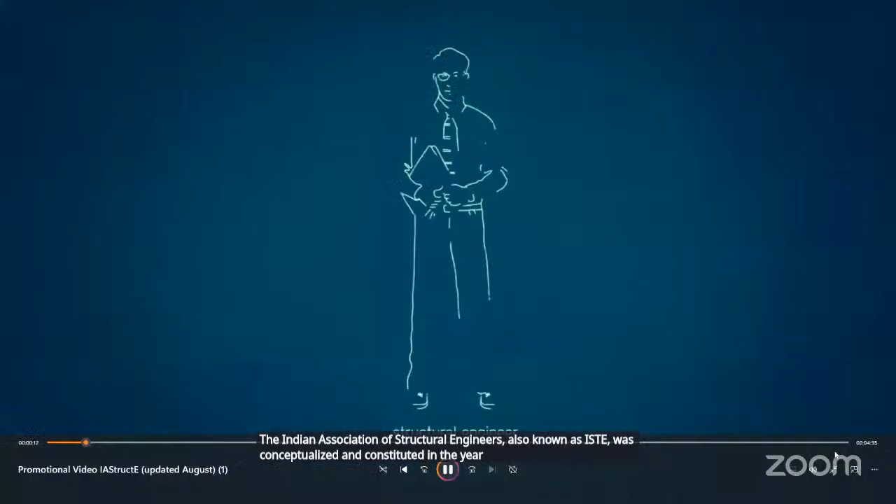The Indian Association of Structural Engineers, also known as IAStructE, was conceptualized and constituted in the year 2002 by a group of senior professional structural engineers from all over the country. IAStructE is registered under the Society's Registration Act 21 of 1860.

IAStructE is a national apex body of structural engineers in India with a mission to promote the structural engineering profession and cater to the professional needs of the structural fraternity. In the short span of two decades, the association has attained an eminent position in the professional field, and its membership is valued very highly in the profession.

Since inception, IAStructE has been led by eminent structural engineers like late Shri Mahendra Raj, late Shri Kumar Ghosh, Shri Subhash Chand Mehrotra, Professor Mahesh Tandon, Shri Alok Bhaumik, Shri Manoj Mittal and Professor R. Pradeep Kumar as its president.

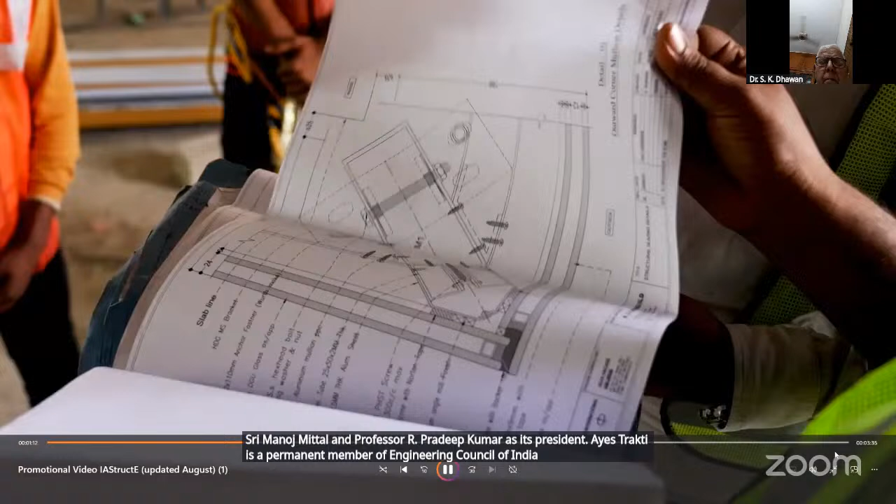IAStructE is a permanent member of the Engineering Council of India and interacts with the government on professional and policy matters related to civil and structural engineers. To expand its reach, IAStructE has collaboration with various international professional like-minded associations and institutions.

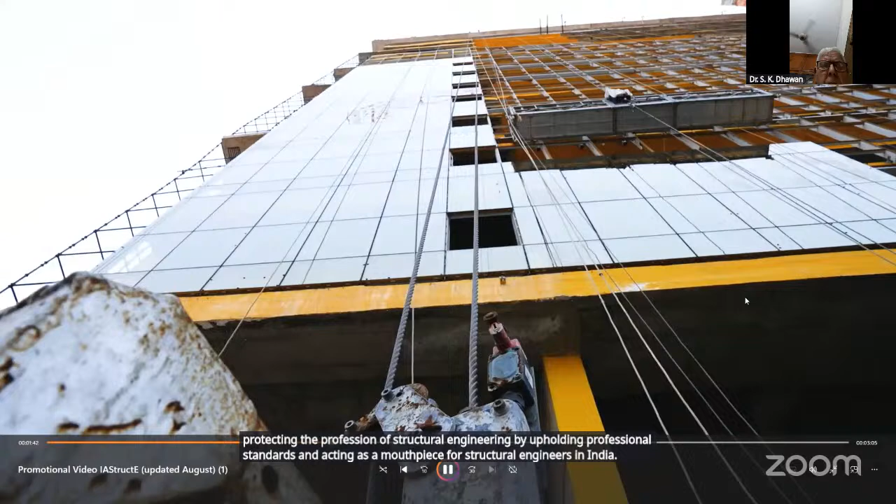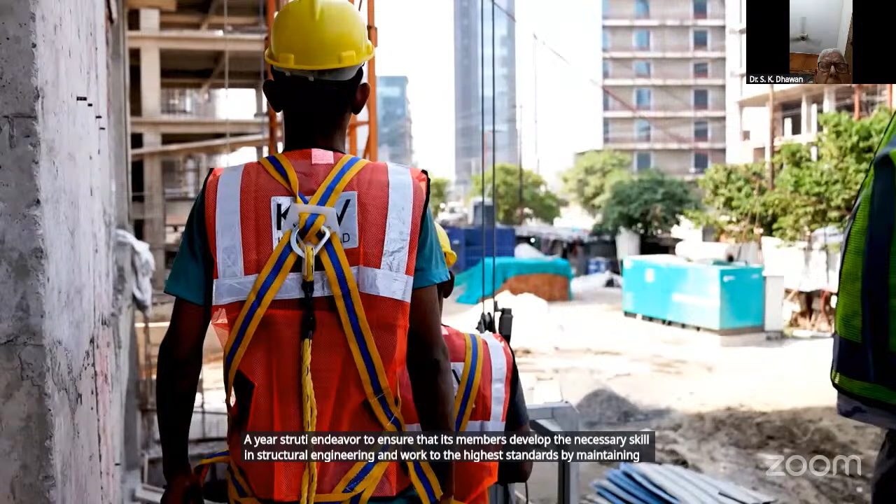IAStructE's prime objective is supporting and protecting the profession of structural engineering by upholding professional standards and acting as a mouthpiece for structural engineers in India. IAStructE endeavors to ensure that its members develop the necessary skill in structural engineering and work to the highest standards by maintaining a commitment to professional ethics and standards.

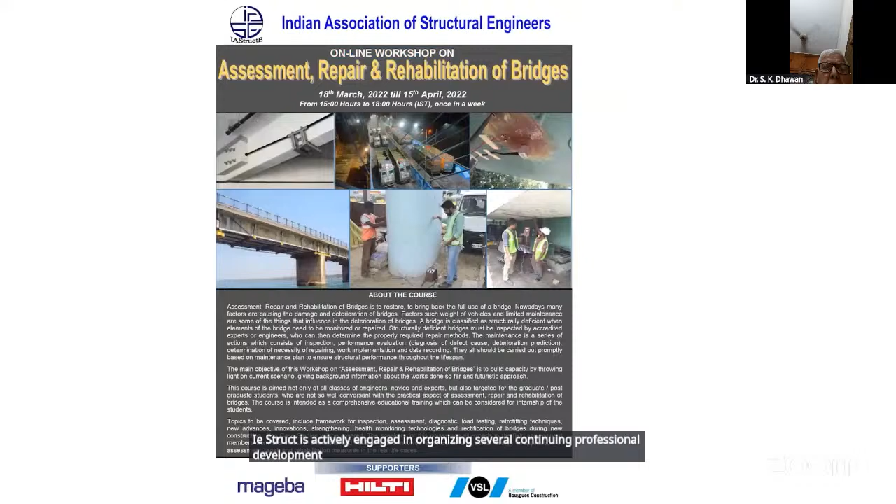IAStructE is actively engaged in organizing several continuing professional development (CPD) courses for structural engineers to help them update their knowledge and advance their career paths. It also conducts refresher courses for young and practicing engineers and student-oriented programs.

Seminars, workshops, conferences, technical lectures and discussions related to the latest technological advancements and case studies are also organized regularly for members to enable them to continuously update their knowledge and skill set by interacting with the best minds from the industry. IAStructE's activities are widely appreciated and known for quality technical content.

IAStructE is also actively engaged in publishing its quarterly journal Structural Engineering Digest (SED), code commentaries, professional guidelines, and a monthly newsletter. IAStructE's publications are becoming popular with time.

IAStructE has representation in various technical committees of BIS and IRC as well. Its members are actively contributing to National Code Formulations.

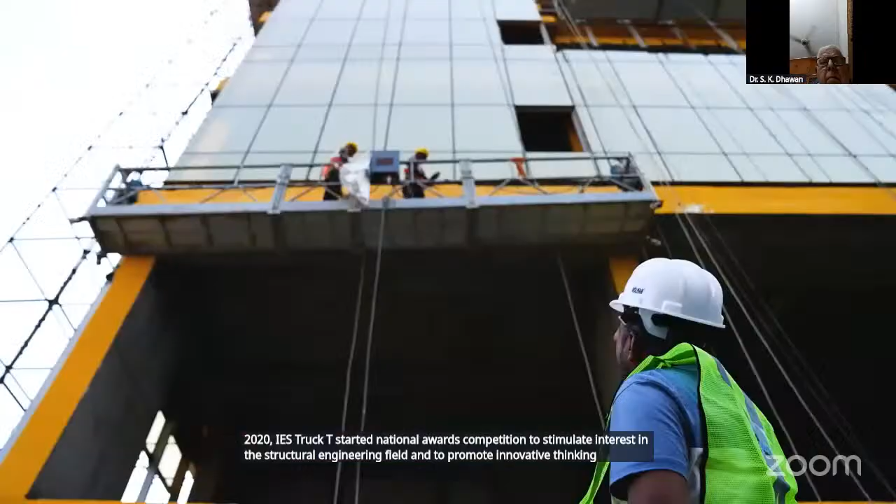In the year 2020, IAStructE started a National Awards competition to stimulate interest in the structural engineering field and to promote innovative thinking and creativity. The awards are presented to winners in recognition of their outstanding contribution to structural engineering in categories including Outstanding Structure, Outstanding Structural Engineer, Outstanding Woman Structural Engineer, Promising Young Structural Engineer, and Best Master's Thesis in Structural Engineering.

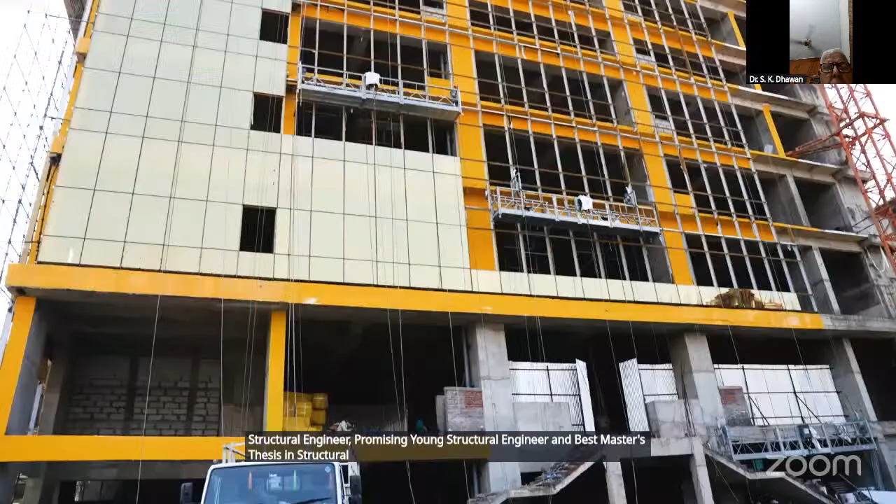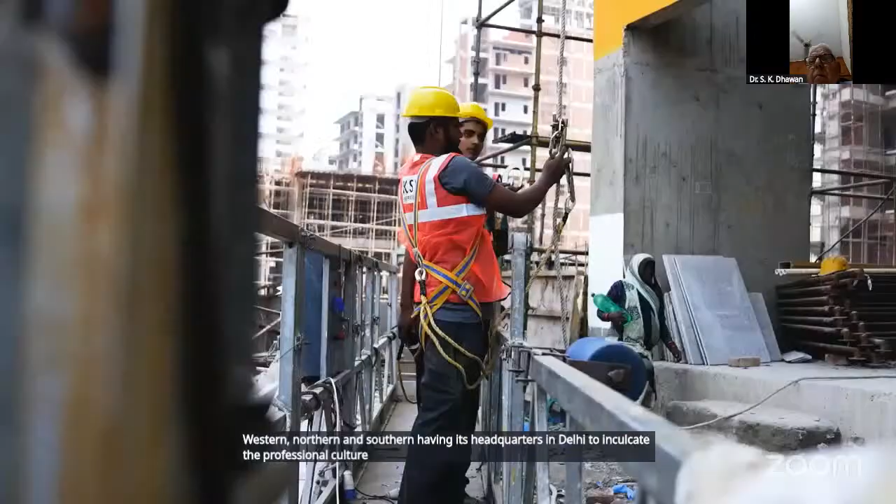IAStructE is currently operating from four regional centers, namely Eastern, Western, Northern, and Southern, with its headquarters in Delhi, to inculcate the professional culture and provide handholding to budding engineers. IAStructE also has student chapters in several leading engineering institutions.

Membership of IAStructE is open to all civil and structural engineers engaged in the structural engineering profession. Members are elected based on their qualifications and experience in different grades as per eligibility requirements prescribed in the bylaws. Each application is carefully scrutinized before electing the members.

More information about IAStructE is available on its website, www.iastructe.co.in.

Vikas, shall I proceed? Yes, sir.

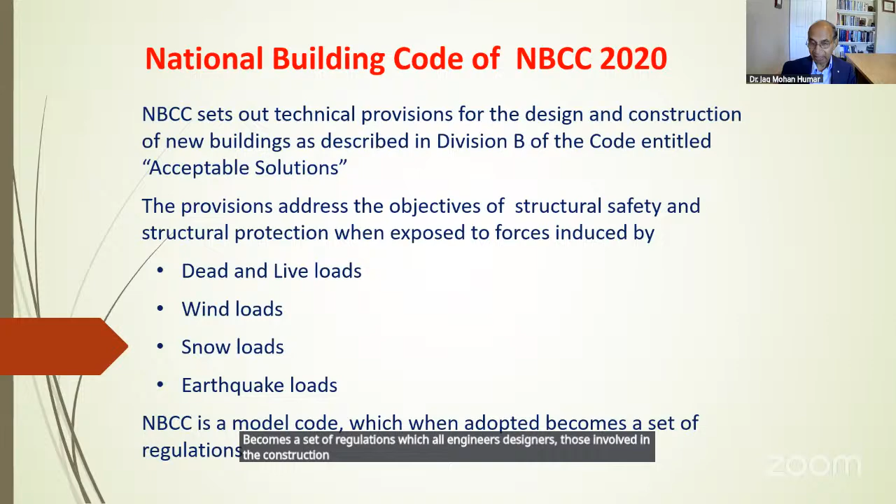This presentation highlights the seismic design provisions of NBCC. They are described in Division B, titled Acceptable Solutions, Part 4, Section 1, Subsection 8 of the code. So the title 4.1.8.1 refers to Part 4 of the code, Section 1, Subsection 8, and items 1 to 23 are referred to as articles. We are going to go through these articles, not all of them probably, but most of the major articles from 1 to 23, which describe the provisions of the National Building Code and how they are used in design and construction.

Now, what's the primary objective of seismic design? What we want is for a normal building to provide life safety protection to its occupants as well as to the general public who may be outside the building when it is subjected to ground shaking caused by a rare earthquake, and that's important. We have to define what kind of earthquake we are designing for. A normal building is designed for an earthquake that has the probability of being exceeded once in 50 years, or a return period of 2,475 years, referred to as the design ground motion. When I say a probability of being exceeded once, the chance is really 2% of being exceeded in 50 years, and the return period works out to 2,475 years. That's the design ground motion. All normal buildings are designed for this design ground motion according to the provisions of this code.

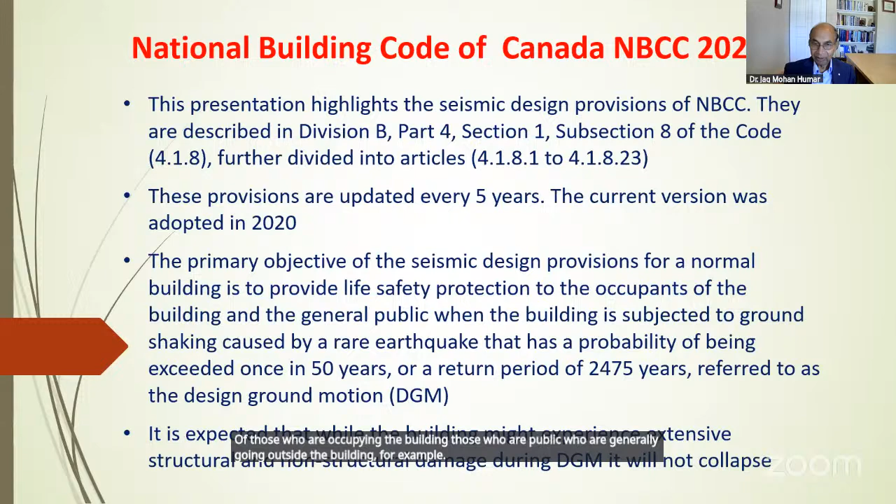Now, it is expected that the building might experience extensive structural and non-structural damage. We are not aiming to keep the building completely untouched, because that would be too expensive for a normal building. For some special buildings we might do something more. But during the design ground motion, it is expected that the building will experience extensive structural and non-structural damage, but it will not collapse. It will not jeopardize the life safety of those occupying the building or the public outside it, for example. So how do we achieve this high degree of safety?

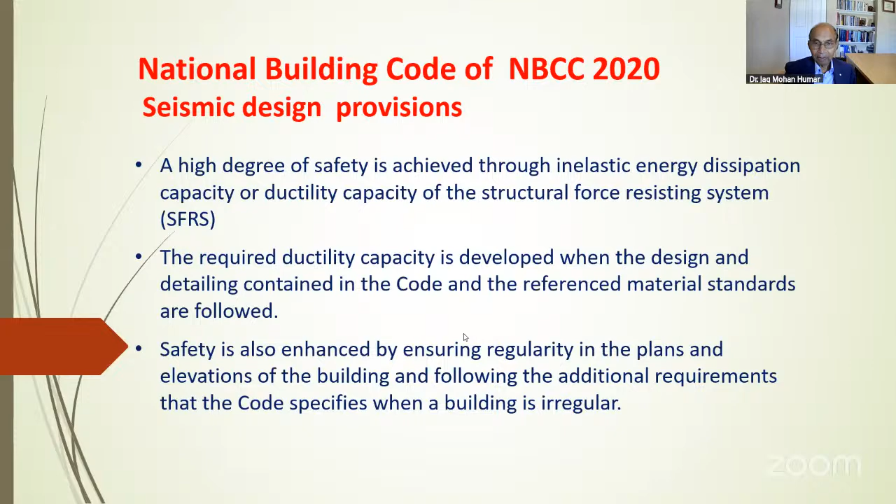There are certain categories of buildings, such as post-disaster buildings, like hospitals, water and sewage treatment plants, and high importance buildings, which are used to be occupied in the case of a disaster or after an earthquake as shelters, such as schools and community centers.

In such cases, the seismic design requirements include limiting the damage caused by the design ground motion level shaking. There will still be damage, but we want to limit it so that the building can either be functional or possible to occupy. For example, post-disaster buildings are expected to remain functional immediately following an earthquake, so one should be able to enter and carry out all expected tasks, such as in a hospital. In addition, they must satisfy requirements related to the force induced by a lower level earthquake.

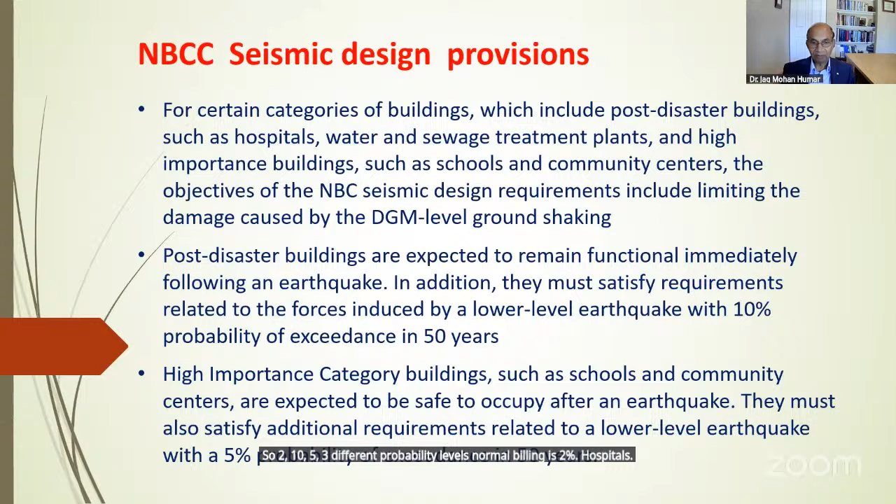This lower level earthquake has a 10% probability of exceedance in 50 years. As said earlier, normal buildings are designed for a 2% in 50-year earthquake, but post-disaster buildings have additional requirements under the 10% probability level. Similarly, high importance buildings used as shelters during and after an earthquake, such as schools and community centers, are expected to be safe to occupy afterward, so they must satisfy additional requirements related to a lower level earthquake with 5% probability of exceedance in 50 years. So there are 3 different probability levels: normal buildings 2%, hospitals 10%, and importance buildings 5%.

Now, as you probably know, Canada is the second largest country in the world next to Russia, with an area of 10 million square kilometers, and the seismic hazard varies widely across the country. So you need to quantify this hazard. In Canada, the task of quantifying the hazard belongs to the Geological Survey of Canada, a department within the Ministry of Natural Resources of Canada, so-called NRCan, which is responsible for determining seismic hazard across the country.

How do they do that? There is data that GSC and its predecessors have collected over a period of 100 years or more, including magnitude and recurrence relationships for seismic events over the last 100 to 150 years. On the basis of that data, analyzed through a probabilistic seismic hazard analysis, it provides the seismic hazard at any site in the country.

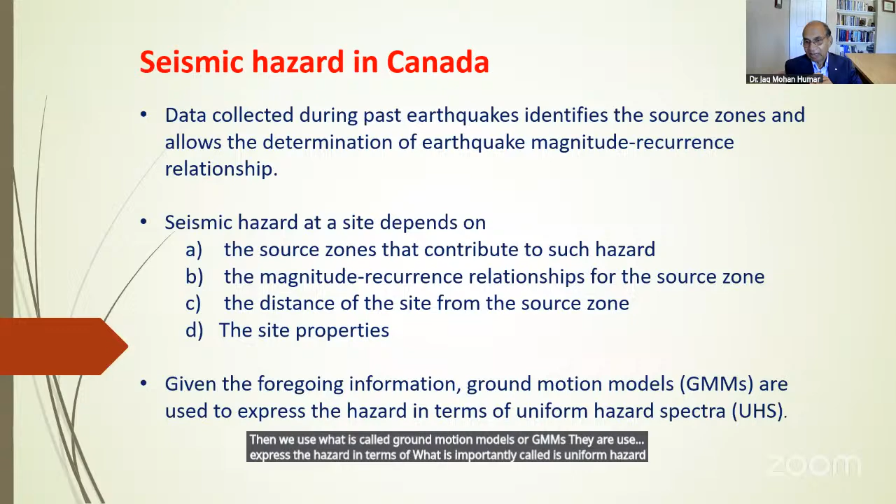If you know these 4 bits of information, then we use what is called ground motion models, or GMMs. They are used to express the hazard in terms of what is importantly called uniform hazard spectra. I need to define that more carefully, because that's an important aspect.

So what does the uniform hazard spectra do? It provides the mean values of the spectral acceleration, which has uniform probability of exceedance. And it provides these values at selected vibration periods of the building. For NBC, these periods are 0.2 seconds, 0.5 seconds, 1.0 seconds, 2 seconds, 5 seconds, and 10 seconds. So these are discrete values that we are given.

Later on, we'll see how, if the period of your building is somewhere in between, you have to interpolate, and how you do that. The seismic hazard information also provides the peak ground acceleration and the peak ground velocity.

The spectral acceleration is represented by the symbol SA, spectral acceleration, for a period T, and for site class X - we will define what X is. T is the period and X defines the site property.

So what is the uniform hazard spectrum? It gives you the spectral acceleration for a system with 5% damping induced by the design ground motion, DGM. We want to find spectra for different probabilities of exceedance: 2%, 5%, 10%. As I said earlier, normal buildings we design for 2% in 50 years, post-disaster buildings for 10%, and high importance buildings for 5%.

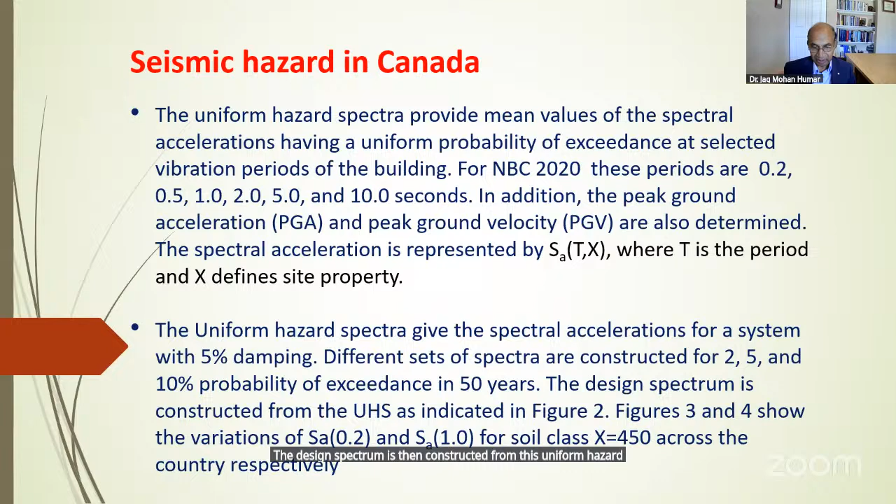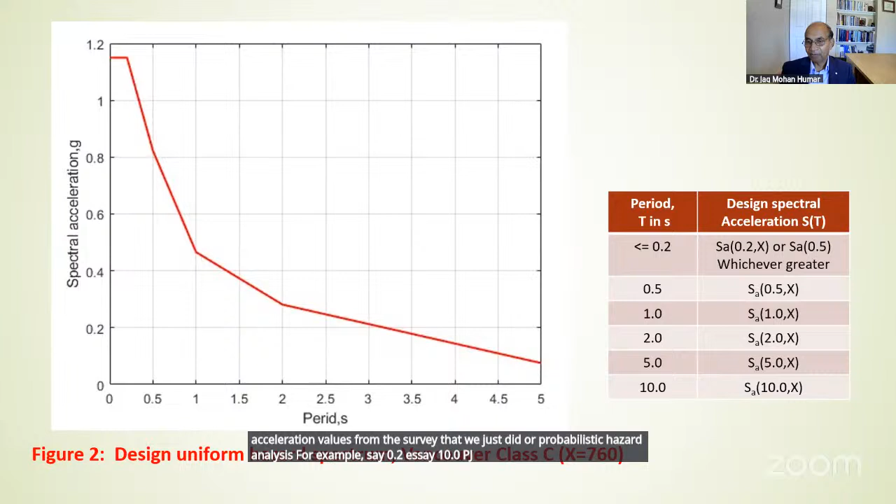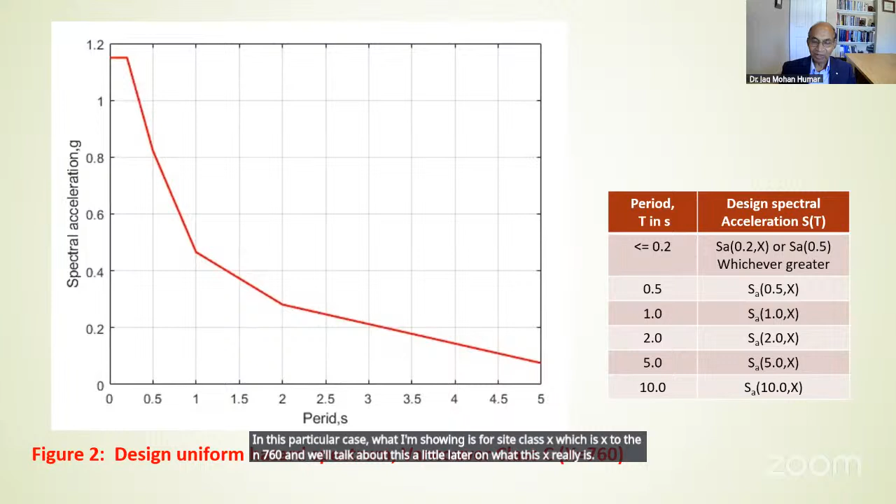First, you find out the SA values, design spectral acceleration values, from the survey we just did, or probabilistic hazard analysis. For example, SA 0.2 to SA 10.0, period 0.2 to period 10.0, for site class X. In this particular case, what I'm showing is for site class X, which has a value 760. We'll talk about this a little later on, what this X really is - it's also called class C.

And this is for Vancouver. So the value of design spectral acceleration at those periods - 0.2, 0.5, 1.0, 2.0, 5.0, and 10.0 - are given as discrete values shown here. For example, this value is for 0.2, this is for 0.5, this is for 1.0, this value is for 2, this value is for 5, and there is a value for 10 which I have not shown here.

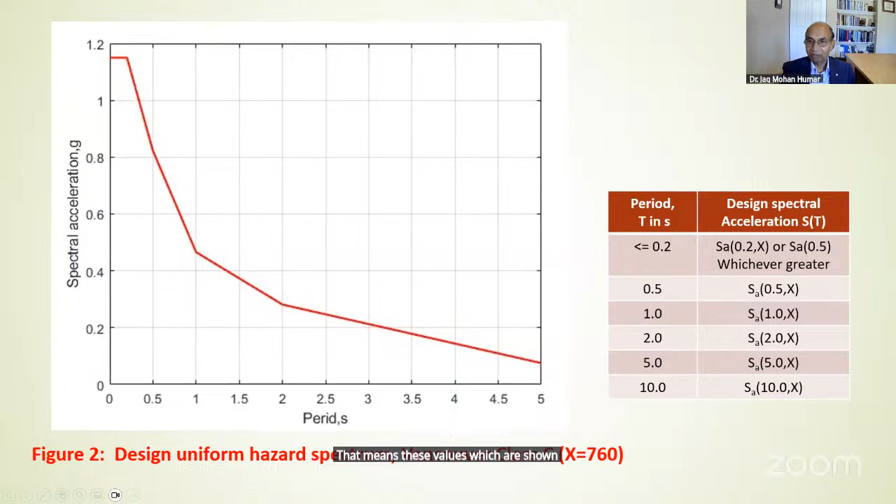In India you use a similar spectra, except that this is a smooth curve, 1 over T in the middle range, with an upper plateau, and a lower limit also given in the Indian National Code. So this is the uniform hazard spectra. When I say uniform hazard, these values shown in the right-hand column of this table have been derived for an earthquake with 2% exceedance probability in 50 years.

Just to show you some variations, this is the value of SA at 0.2 across the country for a probability of exceedance of 2% in 50 years, for site designated as X450. You'll see very high earthquake hazard areas in red, and as you go to the middle plateau, there is not much seismic activity, with values pretty low, anywhere from 0 to 0.1 or so. This is the variation of SA 0.2 as an example.

This is another map showing the variation of SA 1.0, which is much lower, of course.

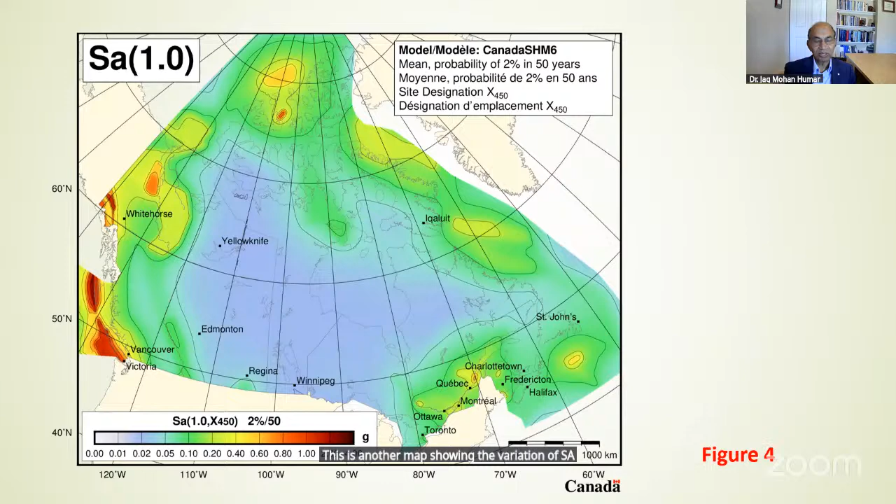Now we'll talk about that X value we have been referring to earlier. The ground motion models we use to calculate hazard include the impact of site properties. The properties of a site are expressed as X sub V, determined using the average shear wave velocity in the ground, calculated from in situ measurements in the top 30 meters of the soil profile below the foundation of the building.

Or if measurement of the shear wave velocity is not made or not possible, then we use what is called XS, where S is a site class determined from either the average standard penetration resistance, N60, or the average undrained shear strength, SU, in the top 30 meters of the ground profile. So you either use the shear wave velocity or N60. Shear wave velocity is preferred, it's more precise.

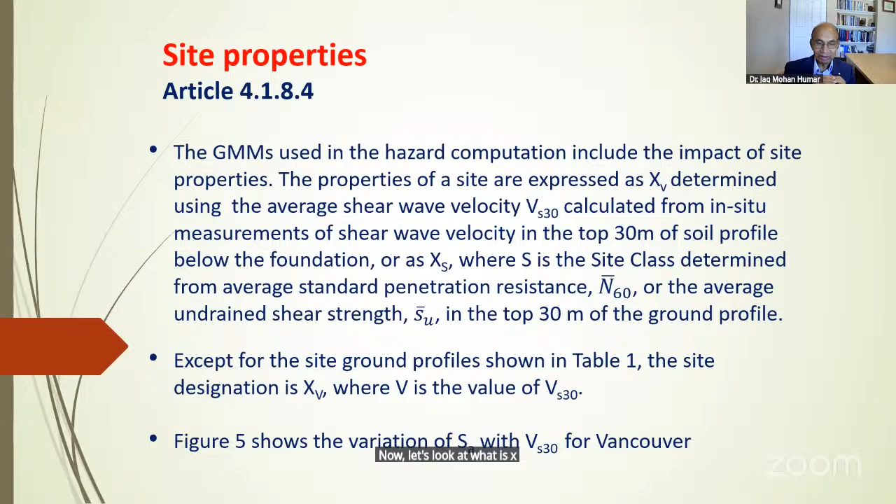If VS30 is greater than 140, but the ground profile has plasticity index greater than 20, moisture content greater than 40%, undrained shear strength less than 25 - it's a very poor, soft soil - then you call it XE, class E, which we'll deal with later. We don't give a V value here because there's no purpose given the very soft soil.

Similarly, if the ground profile contains liquefiable soils, more than 3 meters of peat, more than 8 meters of highly plastic soil, or more than 30 meters of soft to medium clay, it's an even worse situation, and we classify it as XF. So even if you have measured the shear wave velocity in the top 30 meters, you do not use those values - we give them either XF or XE. And if it's more than 760 but has these 3 meters of soft soil, we call it X760, even if it's 800, because of that 3 meters of soil. So these are the 3 exceptions.

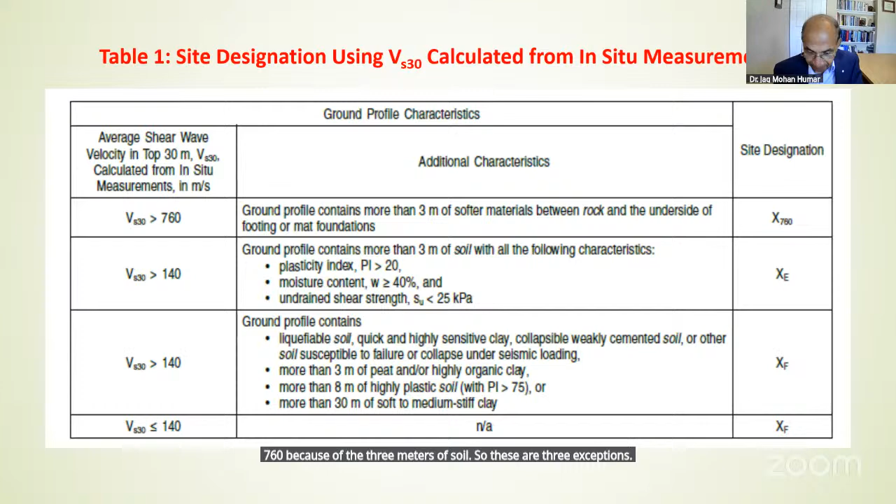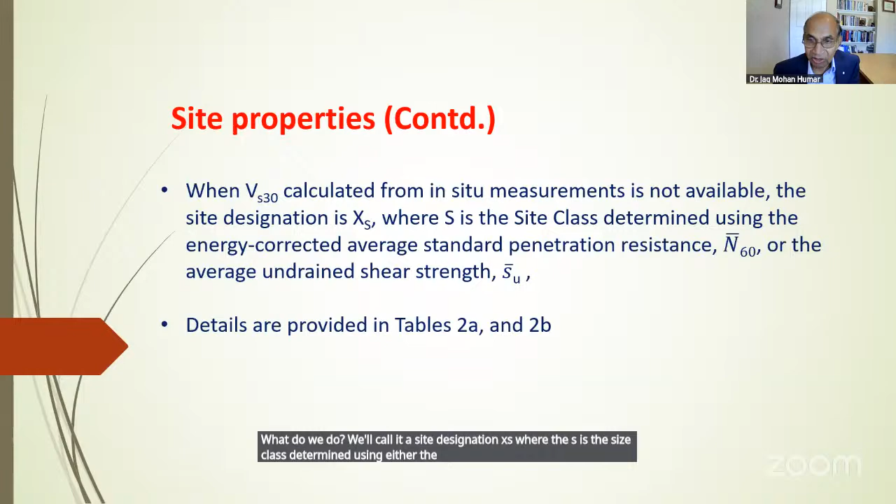So the other situation is when VS30 from in situ measurements is not available. What do we do? We call it site designation XS, where S is the site class determined using either the average standard penetration resistance or the undrained shear strength. The details are in here, for example.

Now, class A, B, C - we got to those classes A, B, C, D, E, F, up to F. If you look at this, you see a column which says VS30. That doesn't mean we have measured VS30 at the site - there may be similar sites from which measurements have been done, and our site may resemble them. So these are off-site measurements if we have them. You may not have them, then that column doesn't exist.

But we do have the average standard penetration resistance, we have the average undrained shear strength. In those cases where you can compare sites and see really very high shear wave velocity on a similar site, we don't need to worry about N60 or SU - we'll simply call it class A or class B as shown here.

But if you have values in between - very dense soil and soft rock - we'll use any one of these to classify the soil as class C, either greater than 50, or SU greater than 100, then we'll call it class C. So you do use any of these three criteria. If you're confident you have a similar site with a measured VS30 between 360 and 760, our site is similar, we call our site C. Or if you don't have that, we go to the average penetration resistance, and if the measured value is greater than 50, we call it class C. So those are the ways, and similarly we do that for D, E, and F - so-called stiff soil, soft soil, other soil.

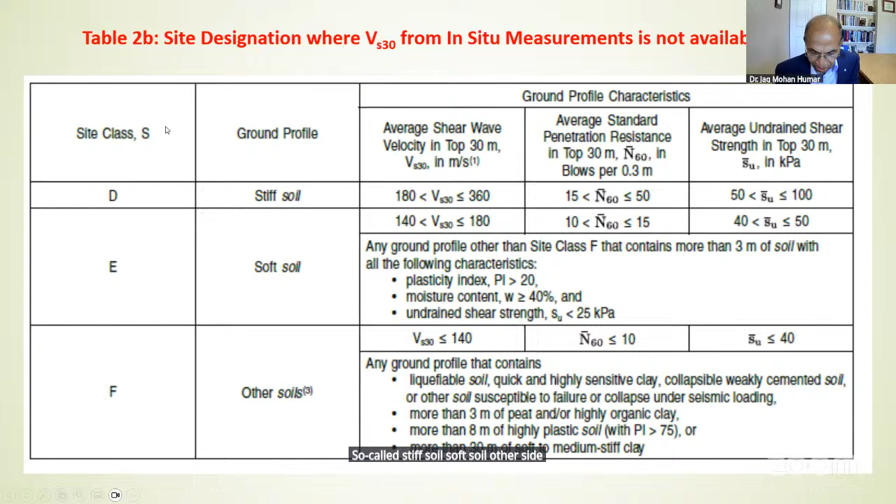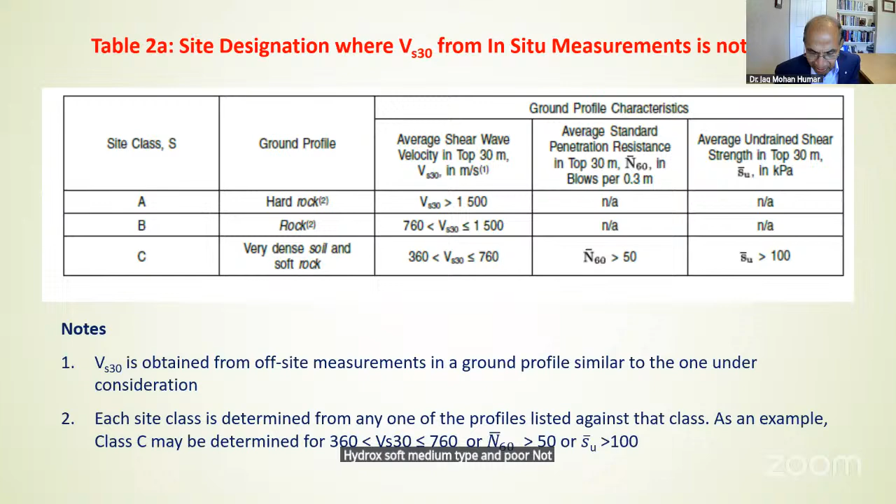Now there are, of course, similar classifications in the Indian standard for different kinds of soils - hard rocks, soft and medium type, and poor. Not exactly defined the same way, but they exist there.

Okay, so how do you find the seismic hazard in Canada? The seismic hazard for a given site is expressed in terms of a uniform hazard spectrum, as I said earlier. You simply go to a tool that the Geological Survey of Canada has produced, which is given in that link. You will have a link when you see the recording. You can click on that link, provide information on where you are located and what kind of soil you have, and you get the values of all the spectral values at those selected periods.

For example, I did this for a specific case of Vancouver. So I provided these values to that link. I said code edition is NBCC 2020. I can get values for the 2015 code as well if I want to. My site designation was XV760. So I provided that. My Vancouver is my city that I'm looking for, and its latitude is 49.25, and its longitude is minus 123.1. Alternatively, if I don't know the latitude and longitude but I know the address of my site, you give that address.

For example, where I am sitting is 3 Huntwood Court. If I provide 3 Huntwood Court, it will automatically locate that on the map and calculate the latitude and longitude, and that's all that matters. So those are the 4 bits of information: code edition, the site designation, and the latitude and longitude of your site. So you got the site type XV, you got your location, and you got the code.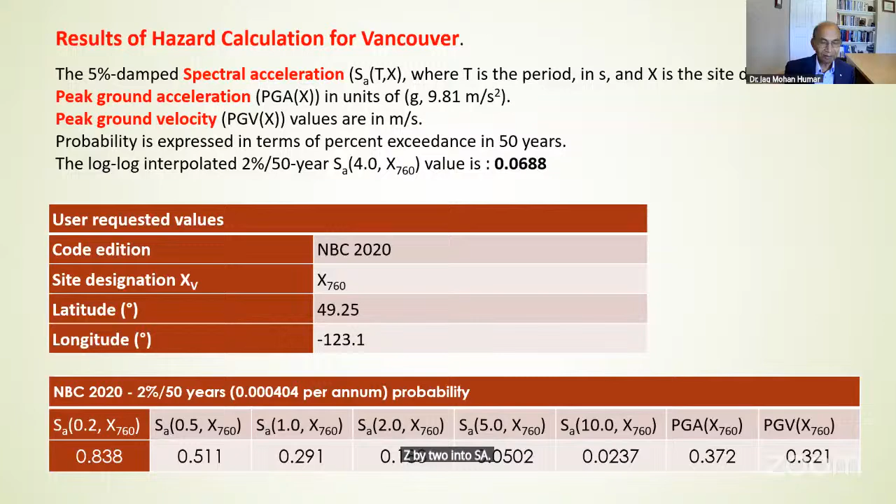Seismicity of Canada is perhaps higher, so you can always compare the two. Z by 2 into SA is what the Indian code gives. It also gives you the values for the 5% in 50-year earthquake, as well as the 10% in 50-year earthquake. Obviously, we need them for high importance buildings and post-disaster buildings. So this is also provided to us.

Okay, so how do you find the values for intermediate values of the period between, say, 0.2 and 0.5, or between 0.5 and 1, between 1 and 2? You are usually asked to do log-log interpolation over the period, and that's the preferred way. You can do linear interpolation, but there will be some error. Log-log interpolation will give you the best results. One specific case here is shown between 2 and 5 seconds.

I did a log-log interpolation for 4 seconds, and I ended up with this value, 0.0688. As you can see, it's between 0.113 and 0.0502. Similarly, values are given for 10% in 50 years. All of that was produced by that link that we just talked about. When you have time, go play with that link, and you will be able to get results for whatever latitude and longitude you wish to.

There are certain parameters that we need to talk about. They are used in seismic design, and these are important parameters. Similar things exist in the Indian code. Several parameters are used to trigger special provisions and restrictions in the design, and these are importance factors, seismic categories, and irregularity types. These 3 are very important in design, as we'll see in a short while.

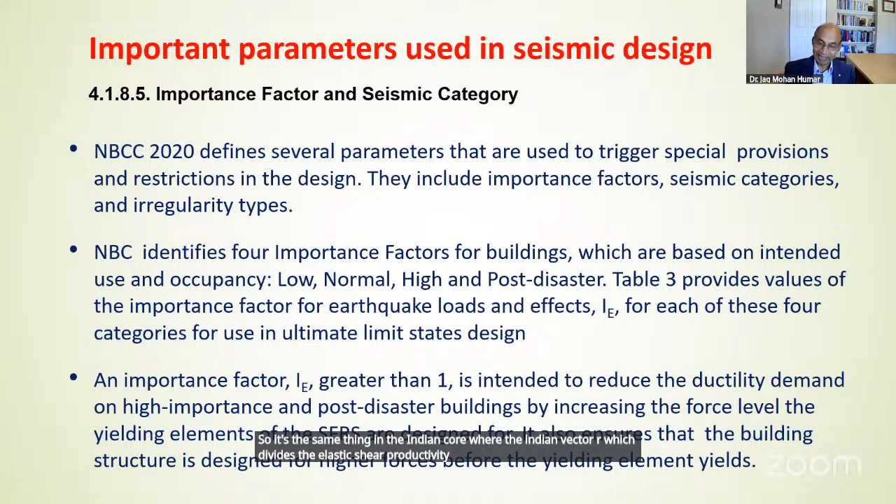So it's the same thing in the Indian code, where the factor R, which divides the elastic shear for ductility, is reduced by IE. So those are some values for the importance factor: low 0.8, normal 1, high 1.3, post-disaster 1.5. The hospitals will have IE equal to 1.5, for example.

Seismic category is another thing used to trigger certain requirements. For example, if the value of IES 0.2 ranges between 0.2 and 0.35, and IES 1.0 ranges between 0.1 and 0.2, then you have these two values. If both are satisfied, it's category SC2. Higher these values, the higher the category, so the risk is more. This is more risky than that one because there are higher values for S.

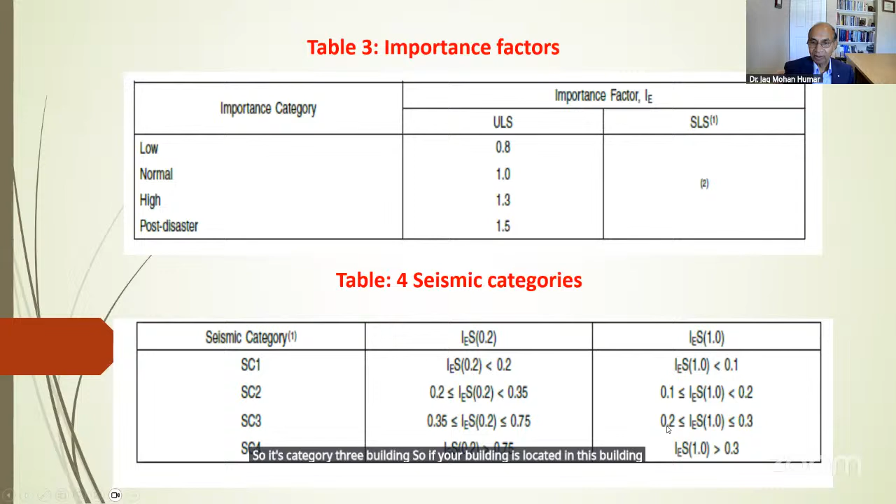So it's category 3 building. If your building is located in these zones, then it's a category 3 building, and so on. If it is in this zone, it's a category 4 building. These are used to define certain limitations on the methods of analysis, and certain restrictions are triggered by these seismic categories. The higher the risk faced by the building, the more restrictive the design becomes. They were introduced in NBCC 2020, as recently as that, as a simplified way to apply a trigger based on importance-modified design accelerations.

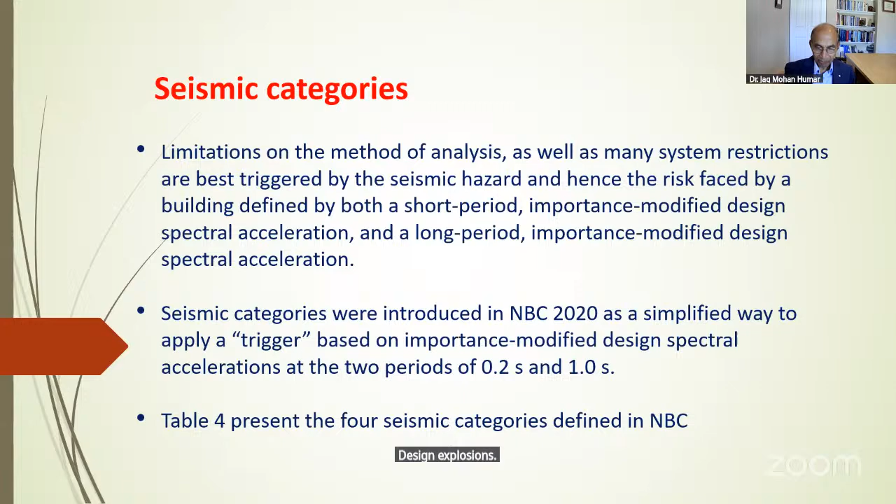Now, the last one that I mentioned was the irregularity. This is very important for structural design of buildings. If a building is irregular, it is more vulnerable, and you have to take special care in designing it. So any of the features listed in the next table, table 5, are designated as irregular. The Indian Code 1893, I believe, also defines different irregularity features and gives diagrams to illustrate what those irregularities stand for.

So structures designated as irregular must satisfy certain provisions referred to in the code. As an example, if you have type 6 irregularity, which means discontinuation in capacity or a weak story, somewhere between two stories there's a middle story which has got weak, big columns, long columns. Weak stories are very, very important to know—a weak story is probably what causes a building to fail.

I've seen, during our visit to Ahmedabad during the earthquake, two very large and important buildings fail at the basement level, because the basement level had only columns with no in-between partition walls. The upper floors had infill masonry partitions or infill masonry walls, so the upper floors were very stiff compared to the ground or basement, which was the parking level. Sure enough, that parking level's columns just failed and the whole building came down.

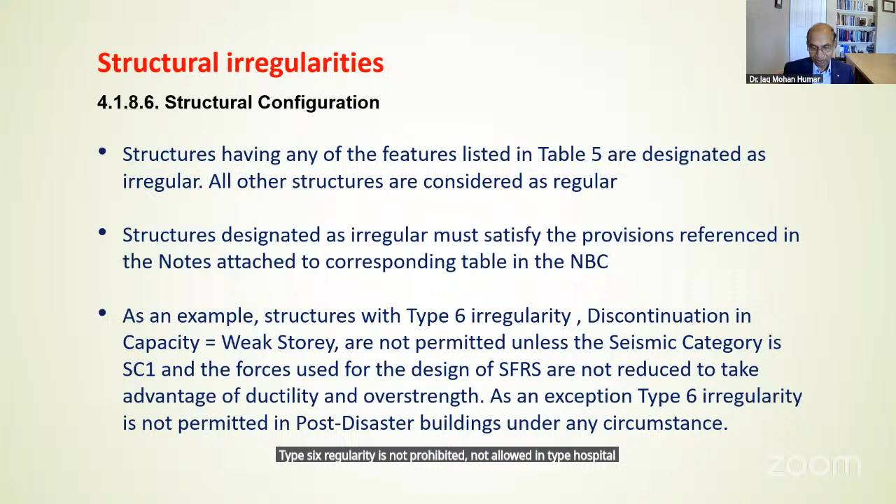And there were examples of this type happening in that area during that earthquake. Type 6 irregularity is not allowed in hospitals or post-disaster buildings, for example. So what are the kind of restrictions and requirements related to irregularity? Either it is completely prohibited—as type 6 irregularity is not allowed in hospitals—or, if allowed, design forces must be increased, or you may be asked to base the design on dynamic analysis, or maybe do a nonlinear analysis.

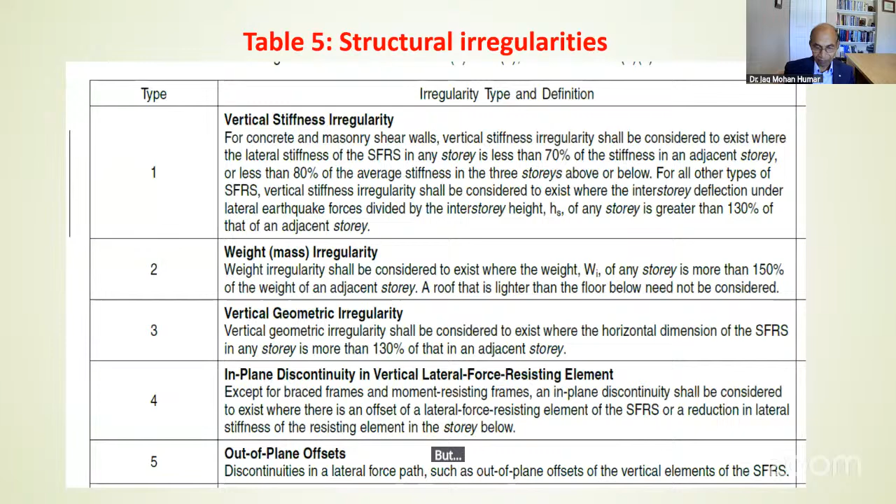So those are the types of restrictions the code specifies for different kinds of irregularities. That's the table of irregularity. I'm not going to go into detail of each one, but out-of-plane offsets are all defined in the code. Let me talk about discontinuity in capacity, or weak story. A weak story is one in which the story shear strength is less than that in the story above. The story shear strength is the total strength of all resisting elements of the SFRS, the seismic force resisting system, sharing the story shear for the direction under consideration. So if you have a weak story somewhere, it's very vulnerable, and type 6 irregularity attracts a lot of restrictions in the design. Torsional sensitivity is another one.

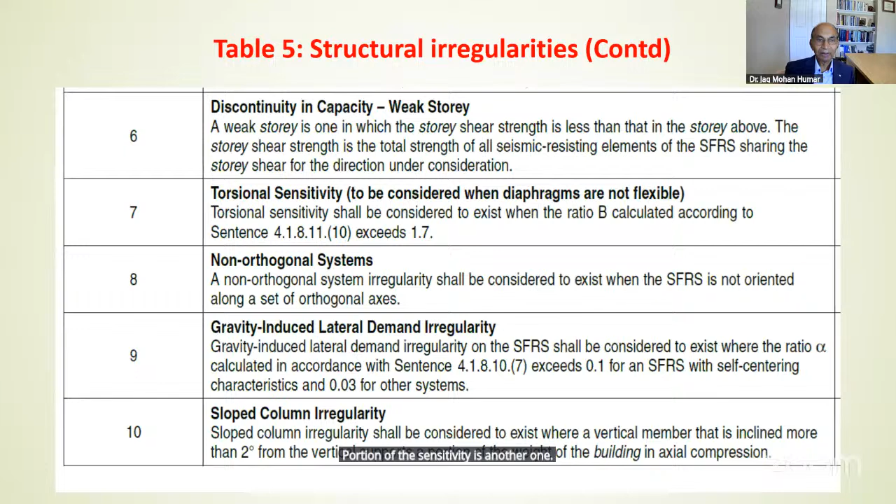Finally, we talk about how do we analyze a building. There are two methods of analysis, as you will see later on.

Normally, you are asked to do dynamic analysis, but you can use equivalent static analysis under certain conditions. One of the following conditions: the structure belongs to seismic category 1 or 2, meaning the risk is low, and it is subjected to low design ground motion.

Other conditions: the structure is regular, less than 60 meters in height, and has a fundamental lateral period TA less than 2 seconds in each of the two orthogonal directions. If all those conditions are satisfied, you can use the equivalent static method. Or, if the structure has irregularity type 2, 3, 4, 5, 6, or 8, but is less than 20 meters in height (a short building) and has a fundamental lateral period less than 0.5 seconds in each of the two orthogonal directions, it qualifies too. Short period buildings are safer.

Long period buildings are not as safe. It's historically seen that shorter buildings suffer less in earthquakes because of reserve strength in short period buildings.

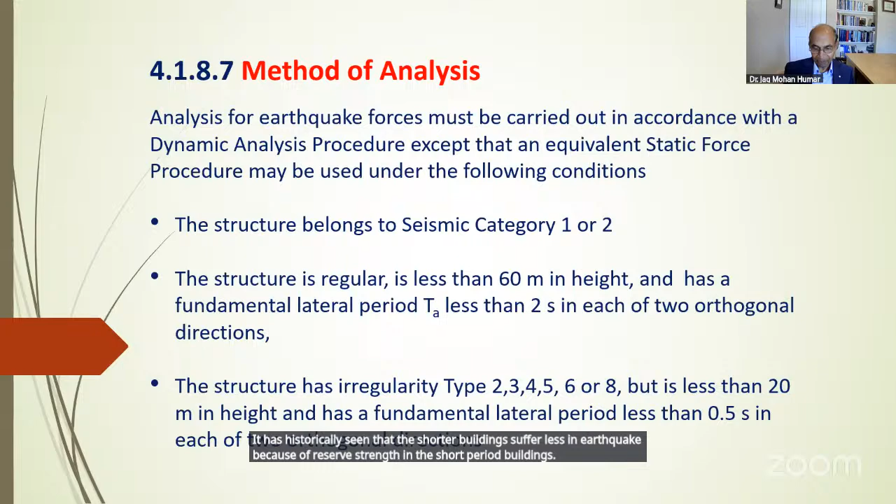The other important thing is which direction your loading is in. Wherever the components of the SFRS, the seismic force resisting system, are oriented along a set of orthogonal axes, you can do an independent analysis in each of these principal axis directions.

If they are not so oriented along a set of orthogonal axes, and the seismic category is SC1 or SC2, independent analysis may be carried out along any two orthogonal axes that you define yourself, if the building belongs to seismic category SC1 or SC2.

On the other hand, if it is not oriented along a set of orthogonal axes, and the seismic category is 3 or 4, the structure should be analyzed independently for two orthogonal directions, one for 100% and the other for 30%. The two should be combined or added to get the final result for the design forces.

You can combine X and Y, for example, 100% X plus 30% Y, or 30% X plus 100% Y, whichever gives you the higher force in the structural element that you're designing.

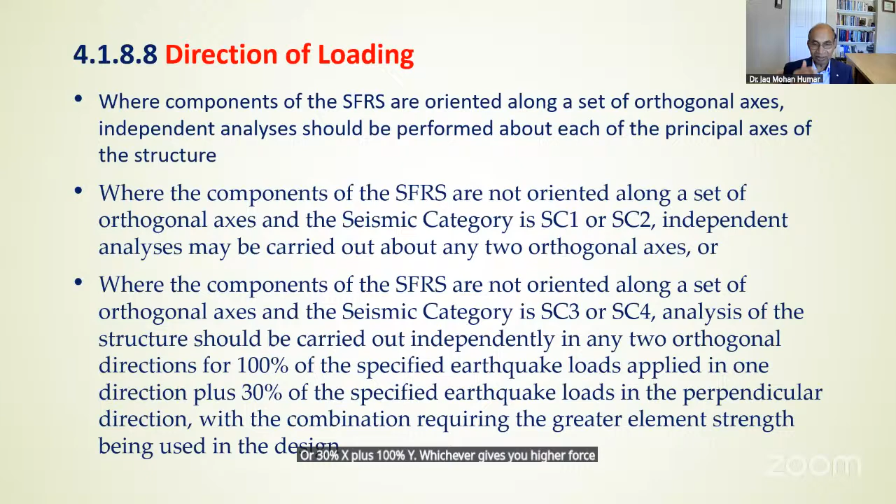One final thing we need to discuss: the ductility-related force reduction factor RD and the overstrength-related reduction factor RO. Whatever you have calculated based on an elastic analysis for your design force, you can reduce it by a reduction factor RD to account for ductility, meaning your structure will yield, but it has enough capacity defined by that RD so that it will not fail.

In addition, all structures have reserve strength which we cannot easily account for in analysis, but it can be based on past experience and experimental evidence. You have calculated strength based on your standards and codes, but there is always some reserve strength in every structure. For example, if you're using a particular strength for your concrete, the real strength will probably be higher. These reserves can be quantified based on experiments, so we use the RO factor, the overstrength factor. RD and RO are the two factors by which we reduce the elastic forces to get our design force.

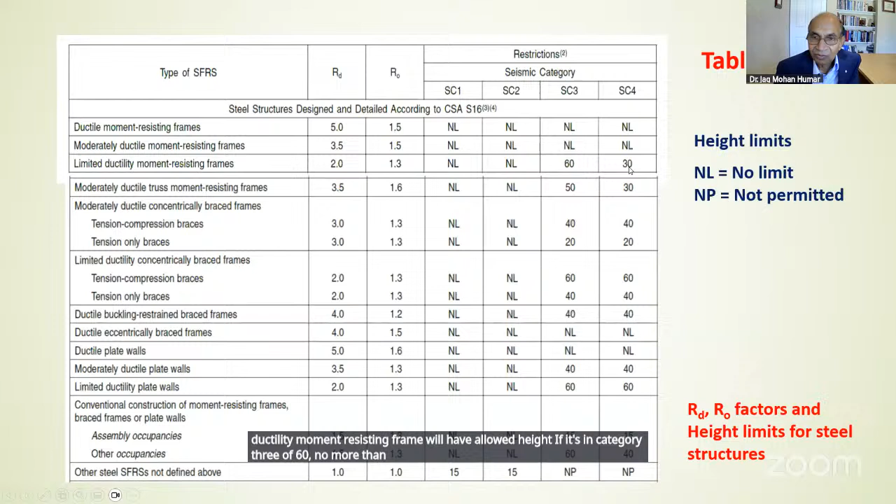The table also gives restrictions on height. NL stands for no limit. For example, a limited ductility moment resisting frame has an allowed height of no more than 60 meters if it's category 3, no more than 30 meters if it's category 4, and so on. If it's NP, it's not permitted.

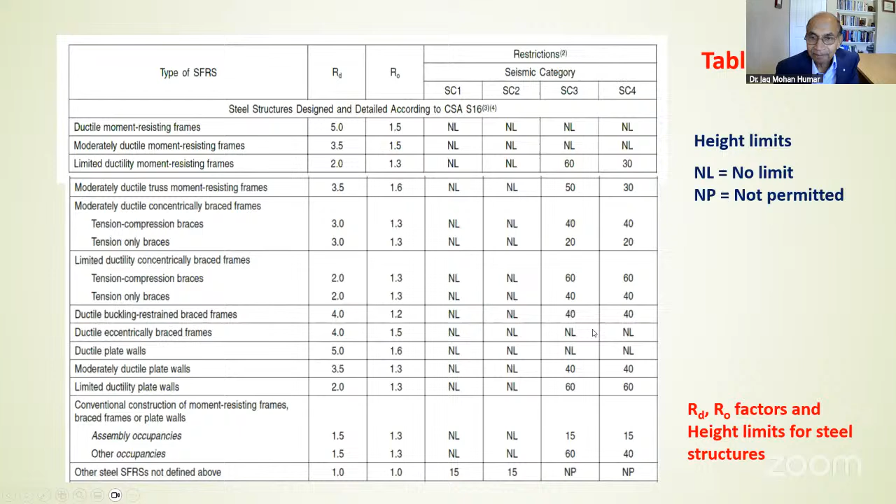That's the situation there, so that table continues here. So now we are ready to discuss the analysis procedures.

We have defined what is RD, the ductility factor. We defined what is RO, the overstrength factor. We talked about W, IE and S, but there is something more here which we'll talk about.

The specified earthquake base shear obtained, which is assumed that the building vibrates in a fundamental mode, is simply S times T times A times W. S you obtain from your hazard curves, the uniform hazard spectra, and W is of course the total weight of the building. So that's the base shear if it is vibrating in its fundamental mode.

Now, of course, the building is not vibrating in its fundamental mode, it's vibrating in a combination of modes, and those of you who have some background on dynamics of structures would know what are the different kinds of modes. If there are different kinds of mode, then you have to account for those modes vibrating together. Then you have a factor called MV, higher mode factor, given in table 7 later on.

RD, as we have also discussed, is ductility, and RO is the overstrength. So simply you take the fundamental mode value S T A W, and you have to modify it to make it less by RD and RO, because you have ductility in your structure and there's overstrength in your structure. And then if you have higher mode contribution, of course most buildings will have higher mode contribution, you multiply by MV. So that gives you the final design base shear.

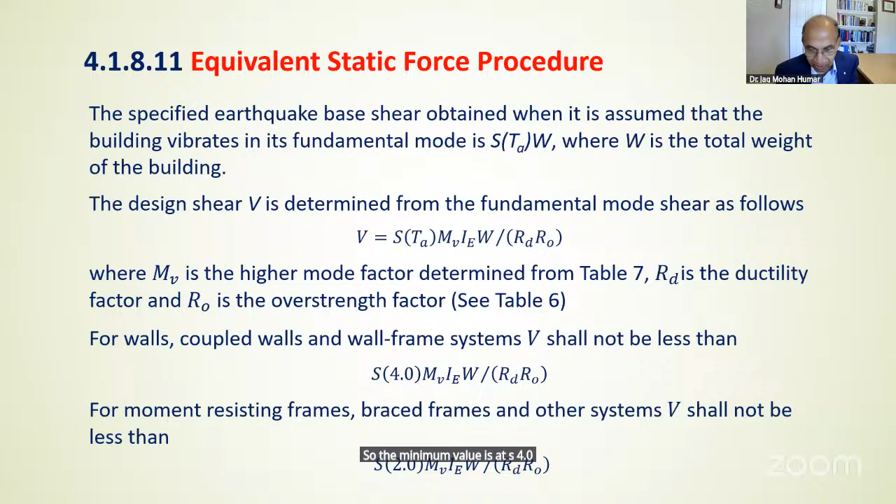In certain cases, we can also have an upper limit, 2/3 of S(0.2) or S(0.5), upper limit, whichever is greater of these two. And this is because the upper limit comes when the building is very short, 0.2 seconds.

And in those short period buildings, there is a lot of strength which is unaccounted for. It has been seen in the past that short buildings or low period buildings perform much better in earthquakes than long period or tall buildings. And we are now comfortable in reducing that or putting an upper limit on this by using this factor 2/3, or one of these factors.

The upper plateau is applied in recognition of the fact that short period structures have been observed to sustain less damage during past earthquakes because they possess extra reserve strength. The upper plateau is at 2/3 of S(0.2), but you cannot go lower than S(0.5).

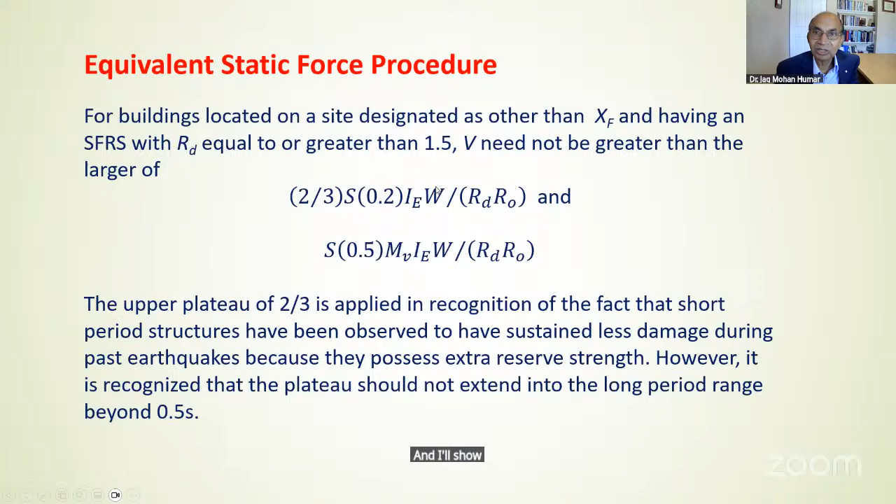I'll show you this again later on just to clarify what that means. You need a fundamental period - how do you get that TA? If you're using the equivalent static force method, you don't want to be doing dynamic analysis, and therefore you don't have a period calculated for which you need a dynamic analysis.

Empirical equations best fitted to the real calculated values.

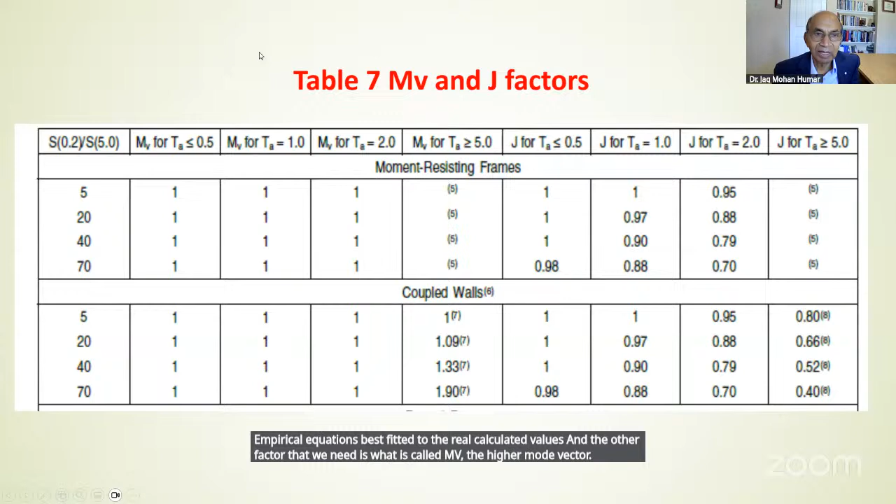The other factor that we need is MV, the higher mode factor. These are tabulated in the code, in table number 7. It depends on the value of the ratio of S at 0.2 to S at 5.0, which can be 5, 20, 40, or in between, and for different periods, MV for 0.5 seconds and less. So you have to do two interpolations, one this way and then this way.

One interpolation is for this ratio and next time for that ratio. This is for moment resisting frames, and this is for coupled walls, for example. So all the MV values, and we'll talk about the J factor shortly. The higher mode factor MV is calculated from these values given in this table.

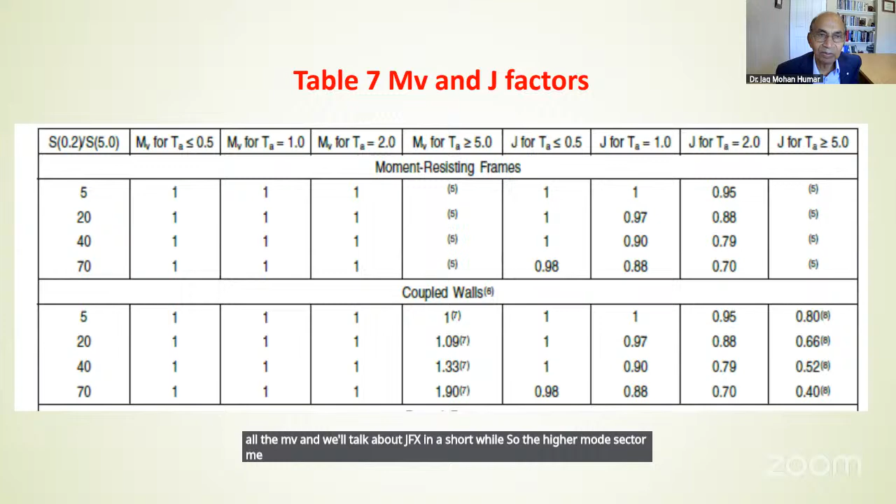Okay, so we found out the base shear. How do we distribute it across the height of the building? First of all, we take a part of that V, and we call it FT, force at the top level of the building. The value of FT is given empirically as 0.07 TA times V, and so on.

The remainder, when you take FT out of V, that's V minus FT, the rest of the shear is distributed along the height of the building. So at the very top, there is this distributed value Fx, but also there is Ft. But other floors just have Fx.

So Fx is how much? It is V minus Ft, the remainder of V, multiplied by Wx, the weight at level x, times the height of level x, divided by the summation of weight times height for all of the floors. That's the Fx value at any level x from 1 to the top. At the top, of course, you have an additional Ft.

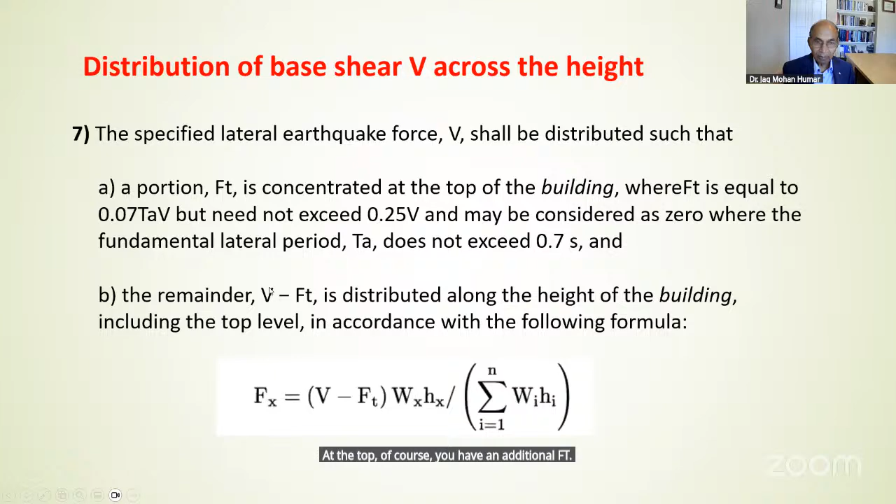Then we do the overturning moment. The overturning moment normally is Fi times the force at any level multiplied by the difference between the height of that level and the height at which you want to calculate the overturning moment. This point is X, where you want to calculate the overturning moment, and the heights go from X to N, from level X to the top level. That would normally be the expression used.

Now we want to reduce it. Why? Because all of these forces, this particular expression we just described, is based on the first mode. Since our values are not just first mode, there are different modes at the same time, so this is an over-calculation. That's too much, and we need to reduce that. There's a reduction factor allowed, given in the code in the table we talked about.

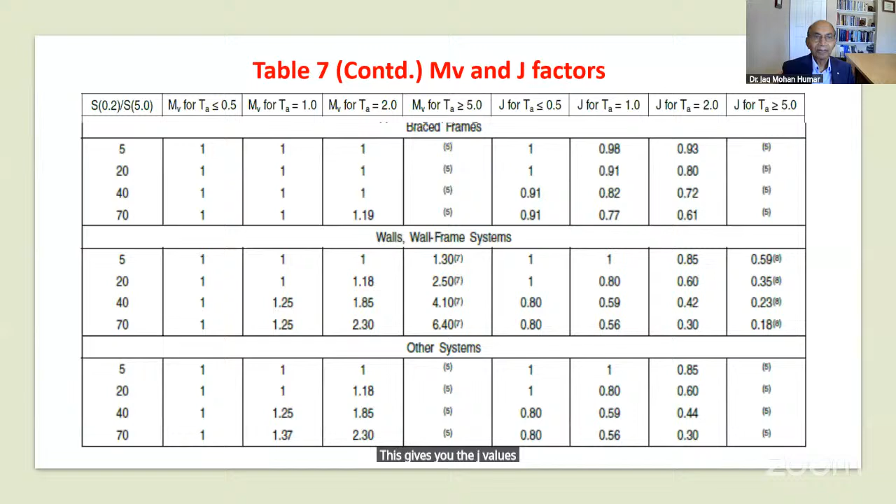This gives you the J values as well, Mv and J values again. So you reduce the overturning moment by Jx, using the value of Jx here: 1 for Hx greater than 0.6 Hn. Jx is J, the base overturning moment reduction factor given in that table, table 7.

Finally, we have done all of our calculations. We found the base shear, distributed it across the height, and found the effect of overturning moment, the effect of ductility, and the effect of upper modes.

The final things we need to talk about are the torsional effects that exist along with the forces we have. These forces just cause shear and horizontal forces, but there are torsional moments that exist for two reasons. If the center of mass and the center of resistance are not in the same line, there is a torsional moment, because the forces act through the center of mass and the building rotates about the center of resistance.

There are also torsional moments due to accidental eccentricities. Even if we have calculated the center of mass and the center of resistance, we may be off in a building. The building might have eccentricities we cannot know, because the seismic structural stiffness is different than what we assumed, or it has deteriorated.

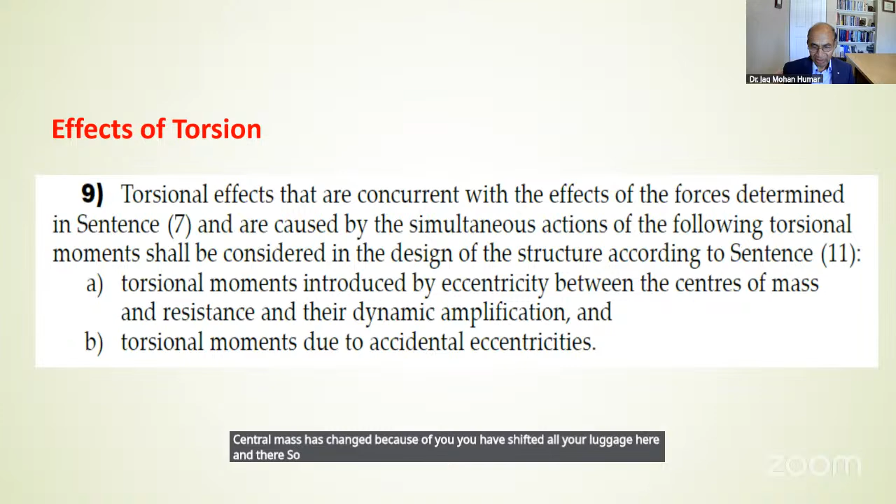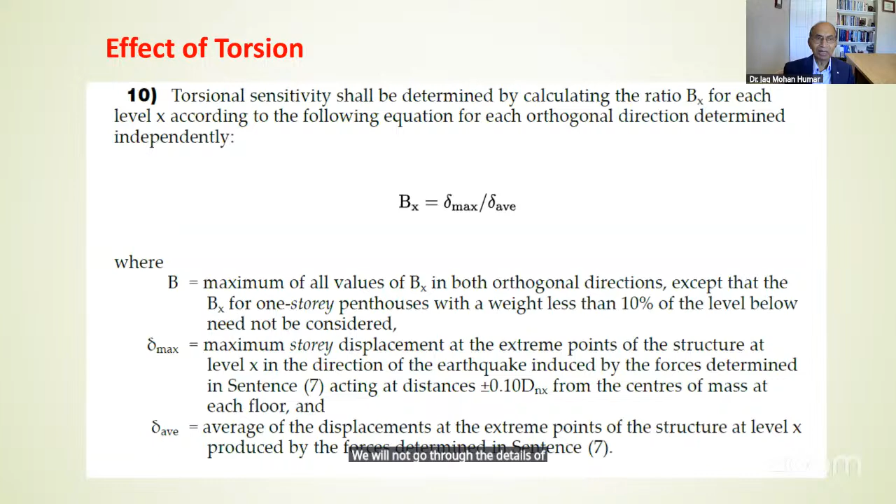We will not go through the details of how that torsion is accounted for. That's too much detail, so I will skip that for the time being. So that's the equivalent static load method.

The final one is the alternative method called the dynamic analysis procedure. You can use either one of these methods: a linear dynamic analysis using the modal response spectrum method or the numerical time history analysis method, or a nonlinear dynamic analysis, which is a special study requiring special analytical tools and skills.

So for the modal response spectrum, of course, we need spectral acceleration values. These are the same values given in your UHS, the Uniform Hazard Spectrum, S(T).

If you use the linear time history method, then you need ground motion history, and you need to create these time motion histories which are compatible with the response spectrum. Those of you who have expertise in finding ground motion time histories know how to create these so that they produce the same spectrum as you have in your design.

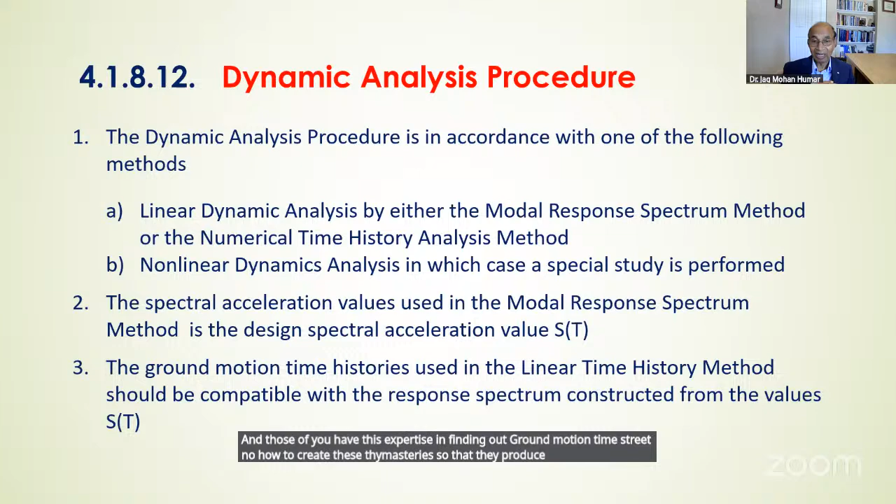Then you have to account for the effects of accidental torsional moments and the other moments caused by the earthquake forces, based on those details that we skipped earlier.

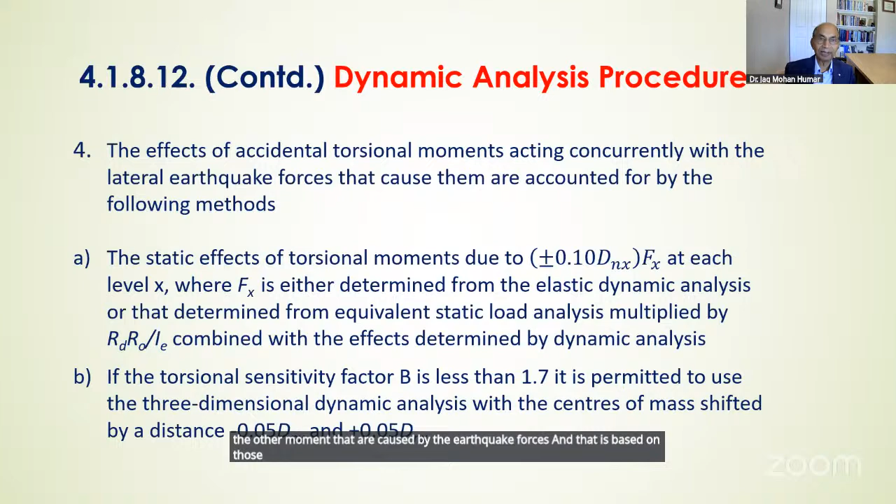Okay, so you find out and adjust the elastic value. You divide it by RD RO multiplied by IE to get your design value. Okay, so far so good. Then you can do a little bit of a trick here.

And these values have to be multiplied by importance factor IE and divided by RD and RO, just as we did in the equivalent static method, to find out the final design values. This gives you the specified lateral earthquake force, which is your design value, VD.

Now, VD should never be less than 0.8 V, as we determined from the equivalent static load method. VD will probably be smaller than V from your equivalent static load method. Capital V is the one you found from the equivalent static load method, VD is what you get from your dynamic analysis, and you usually will get lower than that. But you cannot take less than 0.8 V.

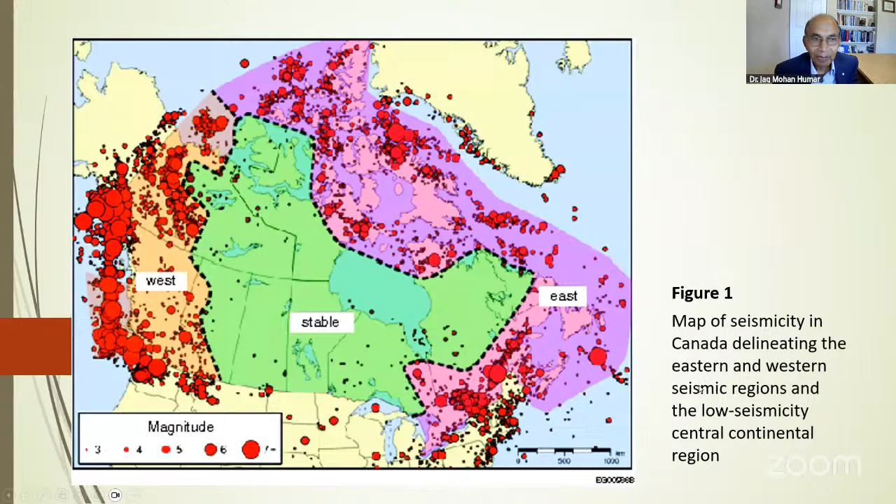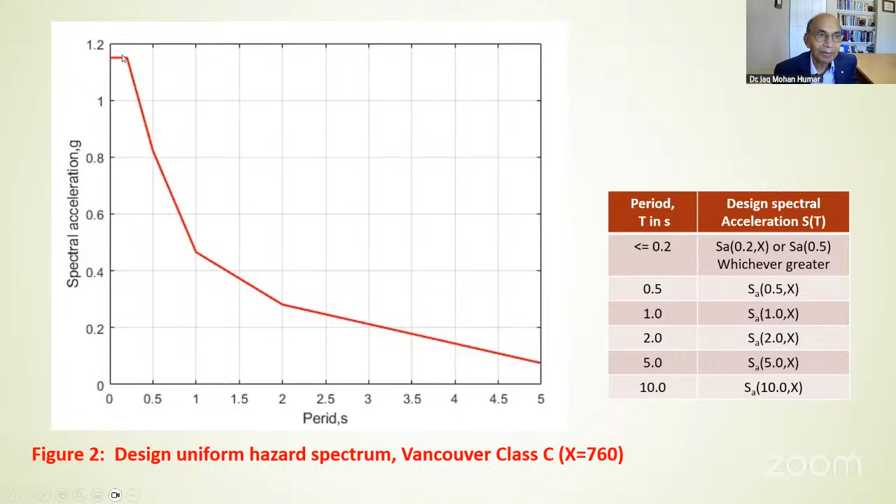Yes, back to the uniform hazard spectra, and you see the upper cap, by 0.2 or 0.5 -- this is 0.2 or less, and this now becomes 2/3 after that. So that's the upper cap. But you should never go less than what is required for 0.5.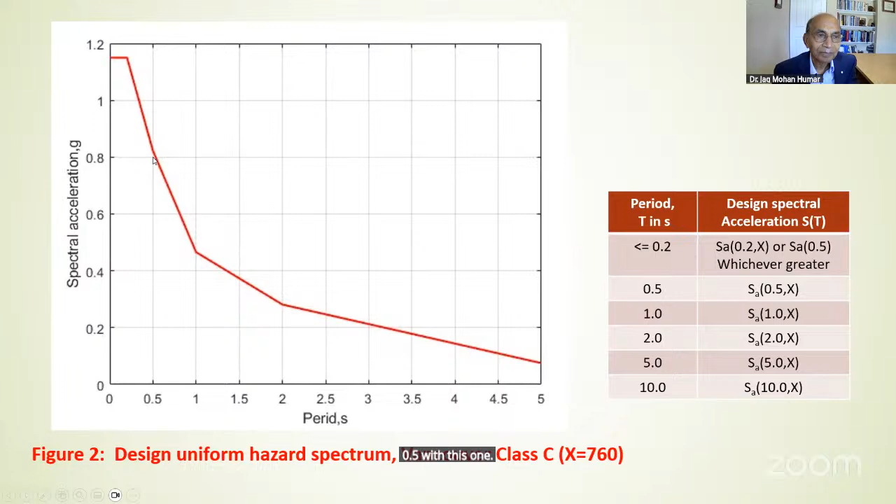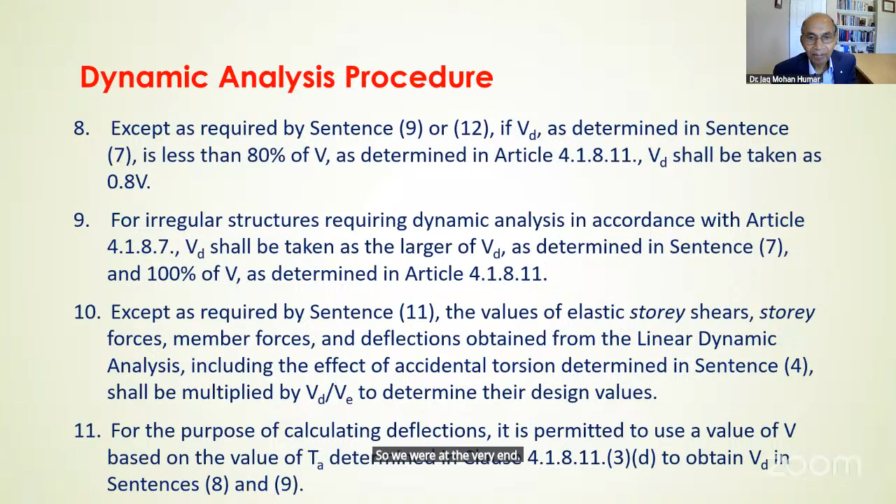So we were at the very end. Let's go to the last slide here. Okay, so we were on the dynamic analysis procedure, that's Article 12, 4.1.8.12. The code doesn't end there -- it has certain more articles, as I said, from 13 to 23 more.

And it has these definitions in these articles. Article number 13 gives you the drift limits, the deflection limits, how much structural separation you need between two buildings, design of diaphragms, collectors, chords, struts, and others, foundation provisions, site stability, non-structural components and equipment housed in the building.

The seismic isolation is an interesting thing. As you probably know, it has been used in many buildings. What you do is put ball bearing type isolators between the structure and the foundation. Any column coming down stops somewhere, and then you insert these seismic isolators or ball bearing type things, and go down to the foundation. So the foundation moves with the earthquake, but the building doesn't move as much because of these isolators, which separate the upper building part from the lower building part.

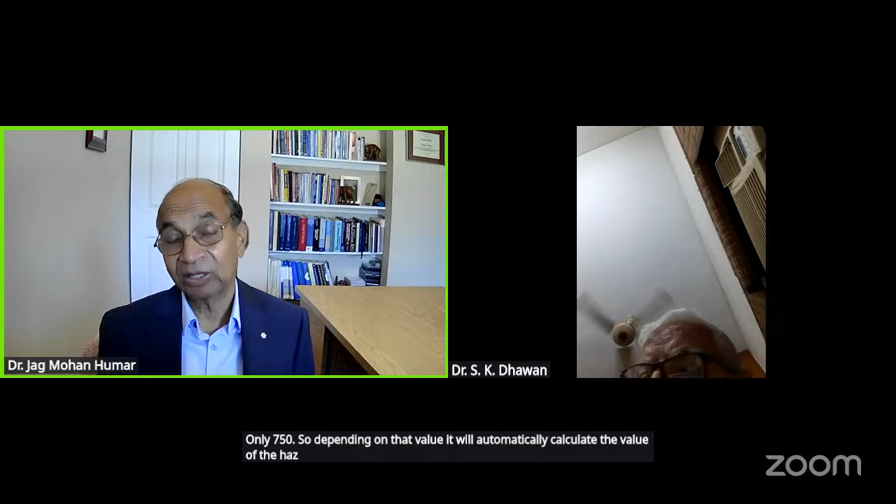And hazard, of course, varies depending on the site property. So for very stiff soil or rock, the hazard is lower. And it automatically determines that for every kind of soil. So you don't have to go to discrete values where we classify soils normally as hard rock, rock, stiff soil, medium stiff soil, low value soil, and then you get values for those hazards. But this particular tool will give you the value for any value of your shear wave velocity. If you have the shear wave velocity measurement. If you don't have, then you have to use those classes A, B, C, D, E, F.

It will provide you the hazard for each of these classes. So X450 simply means that the site soil you have has a property which gives you a shear wave velocity of 450 meters per second, averaged over the 30 meters below the foundation.

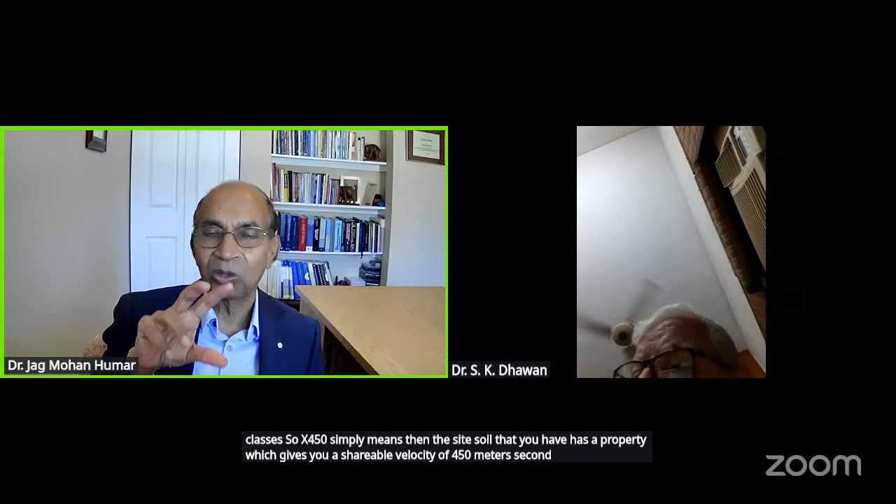Dr. Satish Sharma asked: IS 1893 specifies the maximum value of SA/G as 2.5, in your view. Should this value be upgraded in view of many earthquakes of higher accelerations in the recent past?

Mr. Sunny asked: which is the best book to understand the NBCC 2015 or 2020 provisions for steel and concrete?

The best thing is to look at the commentary of the code. Dynamics books won't give you the code values or discuss the code so much, but the dynamics background is needed. The best place to find out is the commentary - there is a commentary accompanying every code cycle, including NBCC 2020, and it explains enough for you to make judgment values. For each article it gives a commentary on how that article relates to the design, or what's the basis of it. Commentary is accessible online, or wherever you can get the code you can get the commentary as well.

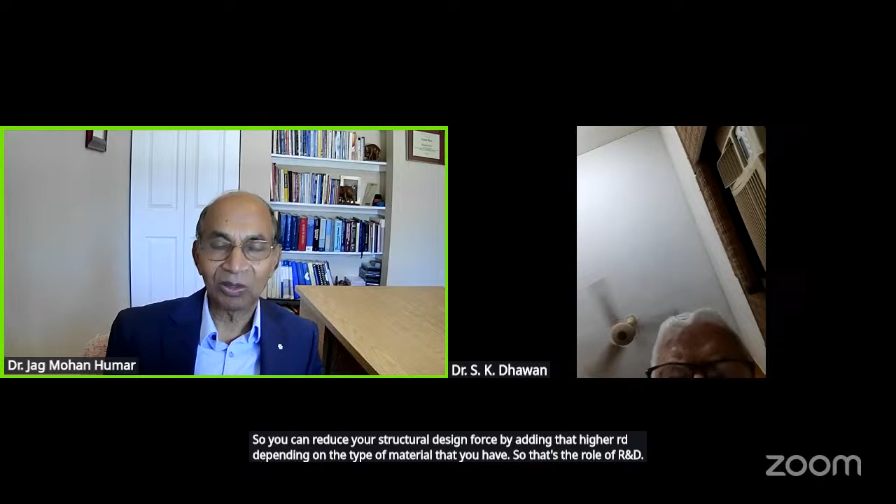RO has a similar role. Some materials have greater reserve strength - a concrete beam, for example, might have greater reserve strength than a timber beam. This depends mainly on the type of material and the type of structural system - is it a column, a beam, or a wall? Based on this you determine RO, based on experimental evidence from the past, and these RO values are tabulated in the code for each structural system. You use the proper RO value and the proper RD value - ductility and overstrength. If you have both, you can reduce your elastic force by RD and RO.

Dr. Subramaniam Narayan sir asks: I heard somewhere that the equivalent static method of analysis gives good results in regular buildings - is it true?

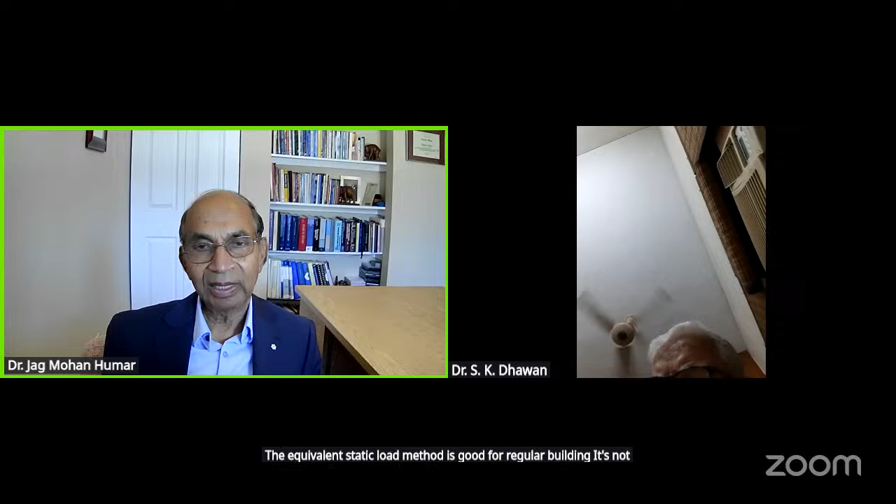The equivalent static load method is good for regular buildings. It's not good for irregular buildings, and the code really defines that irregular buildings of certain types will need dynamic analysis. In fact, some of them might need even a non-linear dynamic analysis, depending on the type of irregularity you have.

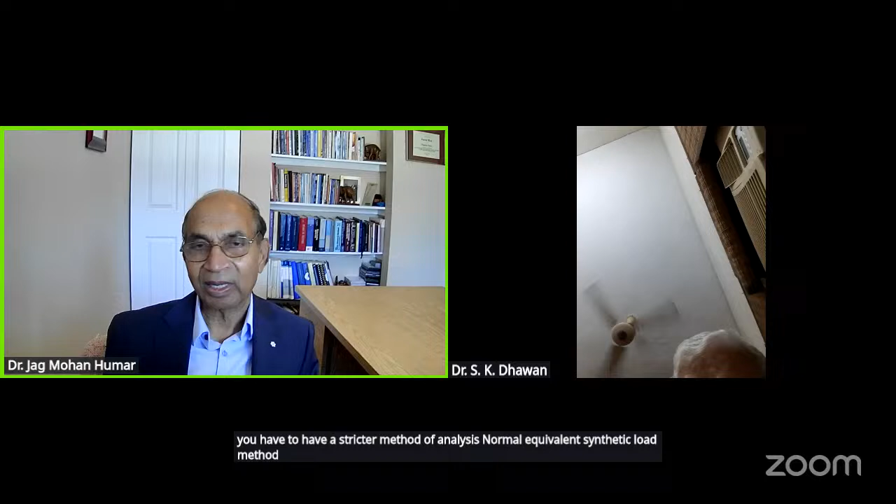Irregularity means you have to have a stricter method of analysis, because the normal equivalent static load method will not work in a building which has got, for example, a weak story, an offset, or drastically changing stiffnesses, different kinds of irregularities that are defined in that table. Any one of those will produce a building which is difficult to analyze using the equivalent static load method, in which case those are prevented.

That's number one. Number two, if it's a high risk building, meaning you belong to a very high value of the hazard spectrum, then again you have to be very careful that you do not use the equivalent static load method, because under high values of those, there is a higher risk or a higher vulnerability.

That's also clearly defined, under what circumstances you can use the equivalent static load method. There are certain restrictions under which you can use it. For a regular building, yes, there is every chance you'll be allowed to use it. If it's an irregular building, there may be restrictions on whether you use it - is it a tall building, is it a short building? Those are some of the risk factors. Depending on that, you can use one or the other method. So the code very specifically lays down the situation in which you can use the equivalent static load method.

And when I say code, it's the National Building Code of Canada, which has got these restrictions laid out. That was part of the presentation. So when you get the recording, you will be able to note that.

Mr. Amit Gupta asked, what are importance factors and RD and RO for a very important structure like a concrete gravity dam?

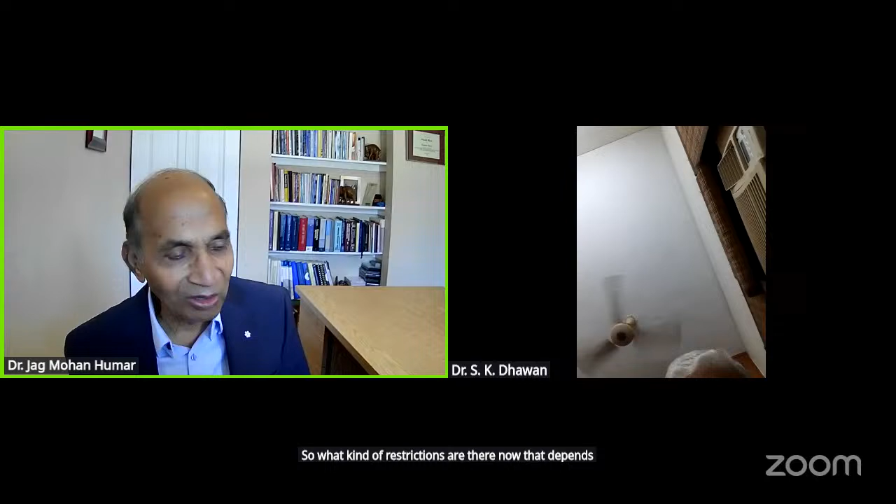That depends on each jurisdiction, or municipality, or province, or state in which you are located. They might give special regulations that all buildings have to be upgraded to 2020, or certain classes of buildings have to be upgraded to 2020. For example, heritage buildings like the parliament we were talking about - we want to upgrade it to the latest one, 2020, let's say. It also depends on cost effectiveness.

You cannot ask every owner of a building to upgrade. For example, you have a home designed for the 2005 code, and now it's 2020 and you want to upgrade it. If you are required to do it, you have to spend money. So the municipal area has to weigh these factors and decide whether everybody should upgrade to 2020. Mostly no, but for critical buildings like hospitals or power plants, you may want to upgrade to the latest code.

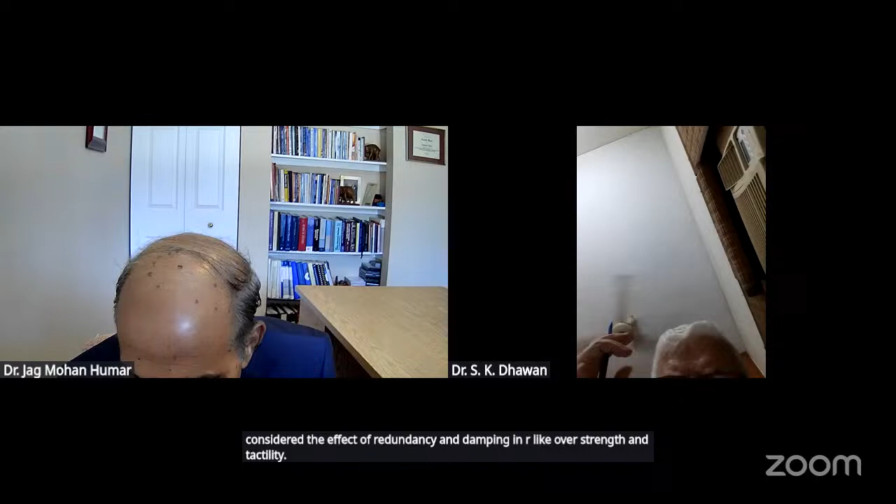Mr. Shashi Shekhar asked: Does the Canadian code consider the effect of redundancy and damping in R, like over-strength and ductility? And his second question: in place of normal concrete, if fiber reinforced concrete is used, how to calculate R, and how to limit the parameter of R calculation if no practical data is available for FRC?

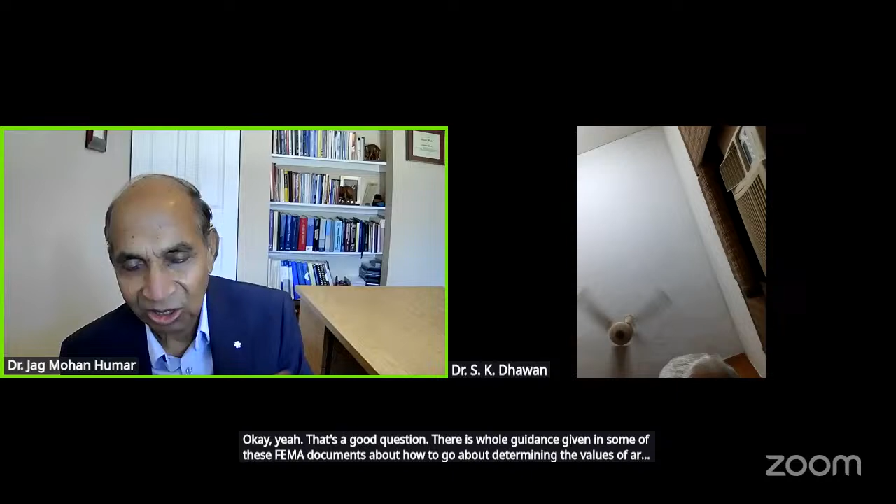That's a good question. There is whole guidance given in some of these FEMA documents about how to go about determining the values of R for types of structural systems not included in the code. Every time you come up with a new structural system, sometimes you have to define what's the RD and RO, and there's a series of methods for doing that. There's a whole document published on it, though I don't remember the number.

For example, when we went to the 2020 code, we redid most of the RD, RO calculations to see whether they comply with the latest methods for determining these values. These are mostly based on experimental evidence for the type of structure and material you have, with specific methods for determining these values. The best way is to find this structural publication, which gives the details. We have a group within our code committees doing exactly that for certain types of structures.

Mr. Sachin Oak asked: I did visit the Senate building in Ottawa last week. For such long-term projects, are the changes in the code applied along the construction period? For example, the Senate building work might have started before NBCC 2020 came out, so will this code be applicable to the construction?

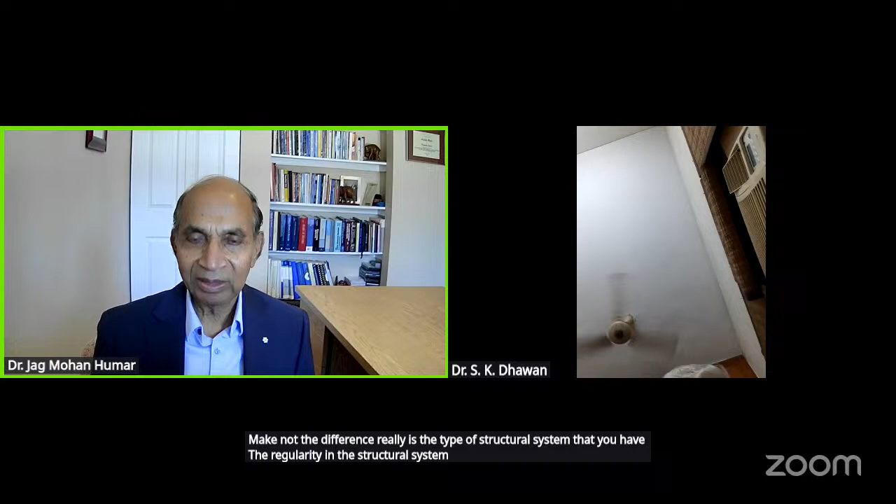Well, for industrial buildings, if you have irregularities, and if it's a straightforward, regular building, you can use the equivalent static load method. It doesn't depend on whether it's industrial or normal, it doesn't really make a difference.

It's the type of structural system you have, the regularity in the structural system, and other factors that we mentioned, that will determine whether you can use one or the other method of analyzing the structure. So if it's industrial, that doesn't really make a difference. Now, the only thing that might make a difference is, for example, if you have a chemical factory producing toxic elements. That's a vulnerable thing because you don't want it to yield or fracture or have cracks. Then you may want to do a nonlinear analysis, depending on the risk involved in that building's failure or going into cracking or yielding. That's where you have either the importance factor determined, or the type of analysis you want to do. So that's the reason you might choose a different way for industrial buildings.

There are certain types of industrial buildings, like nuclear power plants, for example, where you don't want any release of toxicity. So you don't want big cracks, you don't want yielding. You have a different way of designing.

Yeah, thank you very much, sir. These are the only questions.